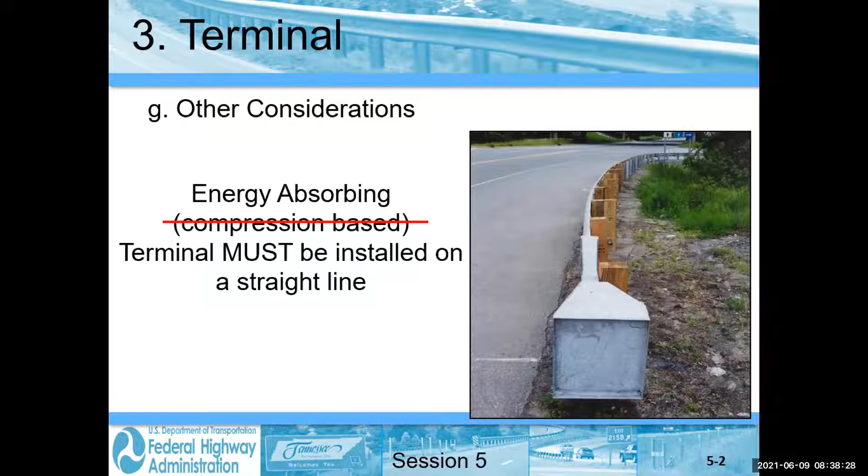The second item we had some discussion about was length of need. Both sessions today are going to talk about length of need for designers at length. Hopefully not excessively so, but so that you have a full grasp of it, because remember, it's the third and probably the most important of the three deficiencies we see in barrier.

I just want to go over this, I know it's a repeat. Some people indicated afterwards in the chat that they were aware of the Memphis situation I mentioned where kids were killed. If the NTSB, the foremost American institution on traffic safety, says this is the worst thing going, we don't want to give them ammunition to counteract what TDOT says in the design guide, that it's the first choice.

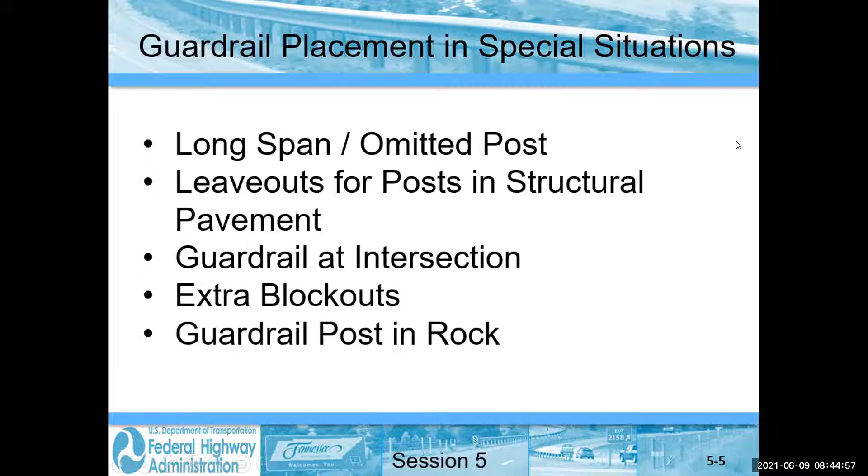Okay, leaving out a post. Many years ago, back in the 80s, we finally did some research to say, can I leave a post out? This is the old G4, 27-inch system, okay? And they said, yeah, I can leave it out, one post, if I nest the W-beam over the span and at least 6 feet on either side, depending where the splice was, okay? And this was issued for everybody to be able to use, and they liked it.

In fact, they liked it so much they said, well, can I leave 2 posts out? And they went and tested that - now this is testing with the big sedan, okay? And that worked too. Same thing: nest over the span, which is now 18 foot, and extended at least 6 foot on either side, okay? Well, they said, what about 3? And they actually went and did a test, and this was to 350 with a pickup.

The result was they needed 100 feet of nested rail centered on the middle of the span, and 3 posts on either side of the span, because there's going to be a lot more deflection. They didn't want a pocket on a more rigid post, so they put in what I'll call a soft post, a breakaway post. That was acceptable on the 350.

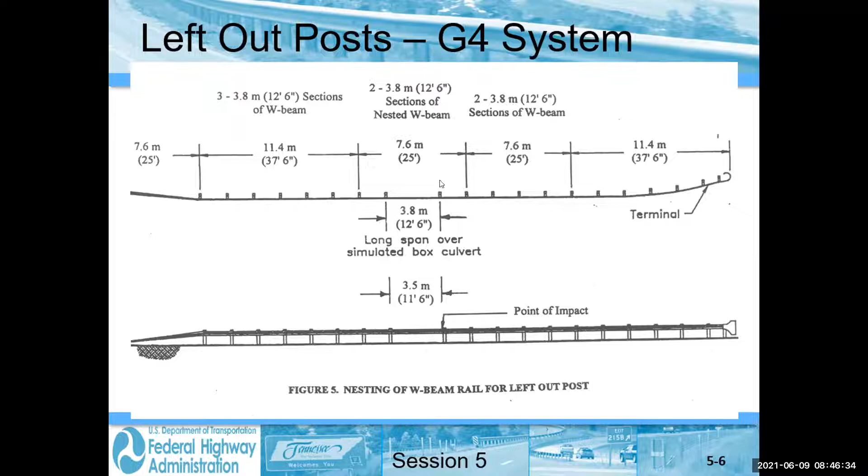Well, now we're in MASH. What do we have? Again, that was the old system. Now we have a better system. Actually, I saw this last night - this is going to be a repeat, but I'm going to show you.

So here I have the MGS system. I took out 3 posts, put it not over ground, but over a culvert headwall no higher than 4 inches. Took out 3 posts, did the same thing, put in 3 weakened posts, and then hit it with the MASH vehicle at 62 miles an hour, 25 degrees. Let's see it.

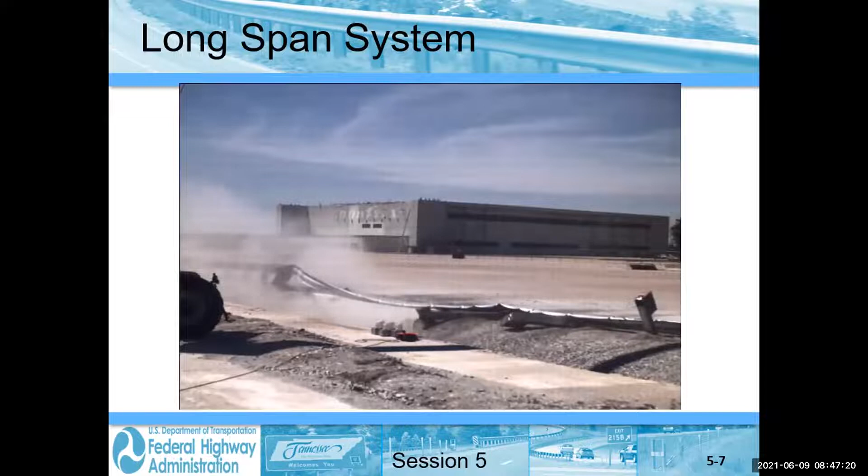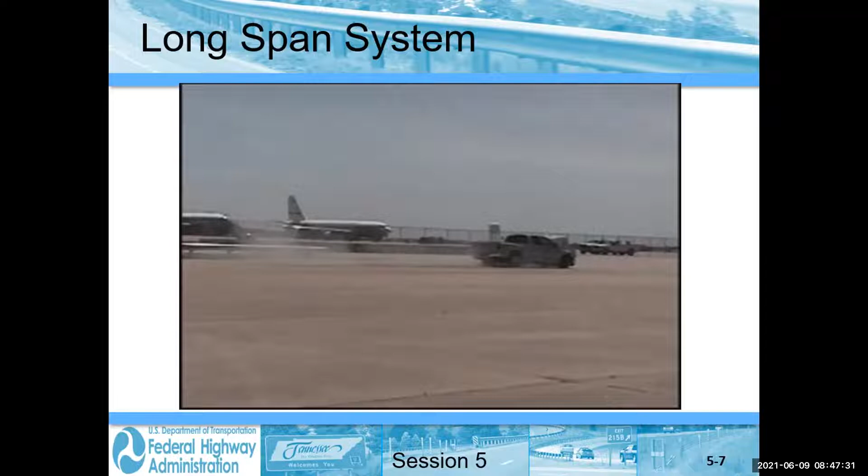Okay, pretty good performance, smooth redirection. It goes out over the void, but because it's engaged the rail and it's up against the rail, it just keeps on going down and we get a safe traverse.

Now, notice down here on the left, the deflection is significantly more. Remember we had 54 inches, I think, for the 8-foot post on the 2-to-1. So we got 40 more inches of deflection, which is fine as long as you've designed for that.

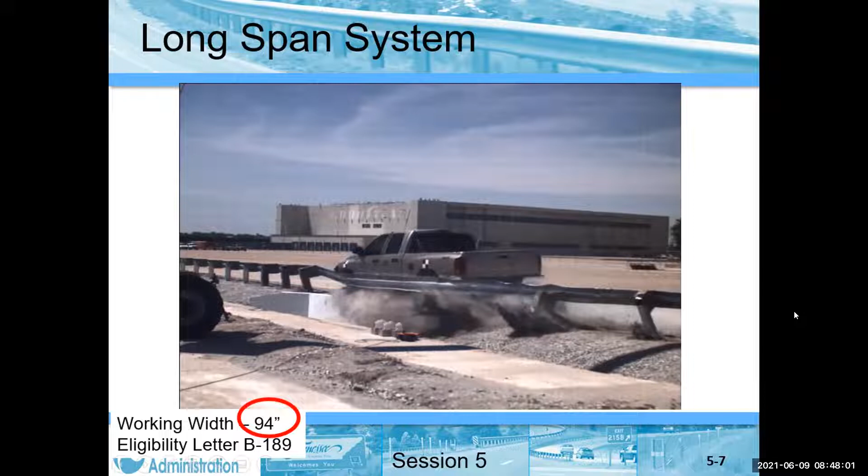So this was testing done with the great MGS system. Based on that, there's been some further development done. But for TDOT, right now, what's in the design guide says, if you have a place where you have to leave out a post, you go to the standard, and we'll see that in a second. If you have to leave out more than 1 post, you go to the standard GRS 3, and that's building a pad, a concrete pad, to mount the post to, if you can't drive it. We'll see that. So as of today, TDOT does not have something representing the video you just saw.

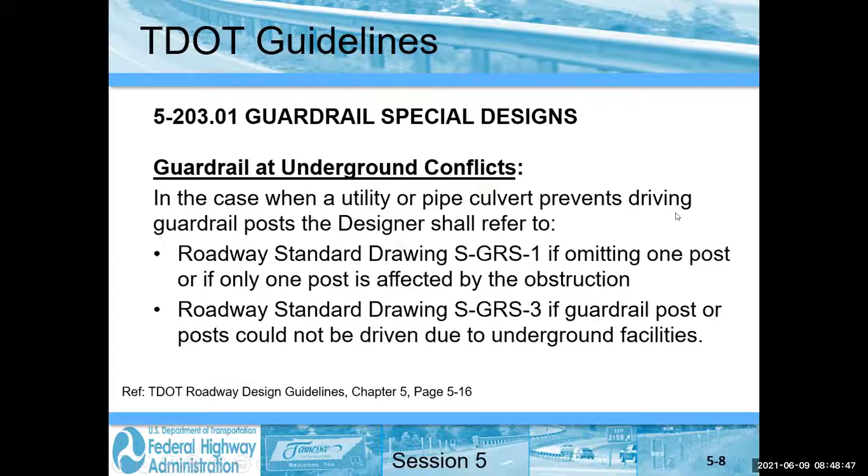And even as we're going to see on the -1, here we have the -1. Well, we have a missing post in here. That's fine. It's a 25-foot panel shown, except it says that over this panel, right here - you probably can't read it, but if you have your standards available, you would see that it says nested rail for 1 post out.

Well, we took 3 posts out and we didn't nest the rail, but we changed the post. Well, if it's good for 3 posts out, it's good for 2 posts out. Good for 2 posts out is probably good for 1 post out. But then we have to go to the yard and bring out 6 of these special wood posts. Here with your system, your standard, you're just using standard post, but you are nesting the rail for 37 feet.

Well, some people said, you know, this system is so good - yeah, you took 3 posts out and you had to come out with those wood posts. I'll bet you if you just take 1 post out, do nothing else, standard steel post, but no nesting, it would work. Now you can see I put up here developing. So always be aware of this - if you ever put in guardrail, you know that nesting rail is not a nice thing. So this is much simpler.

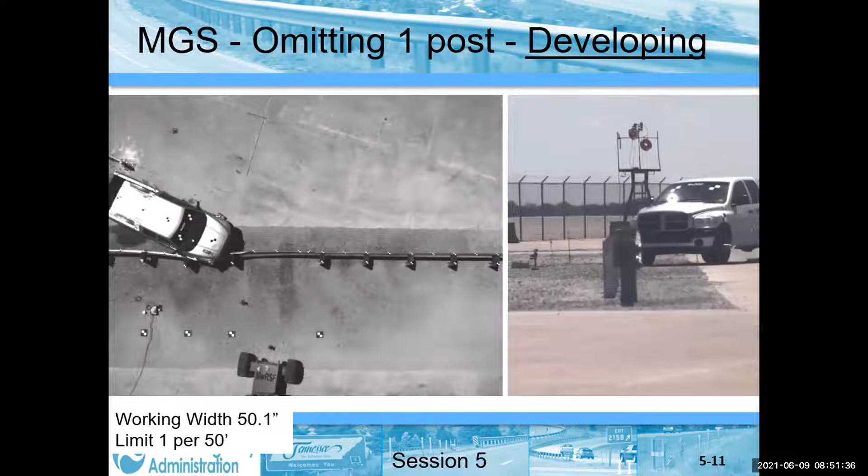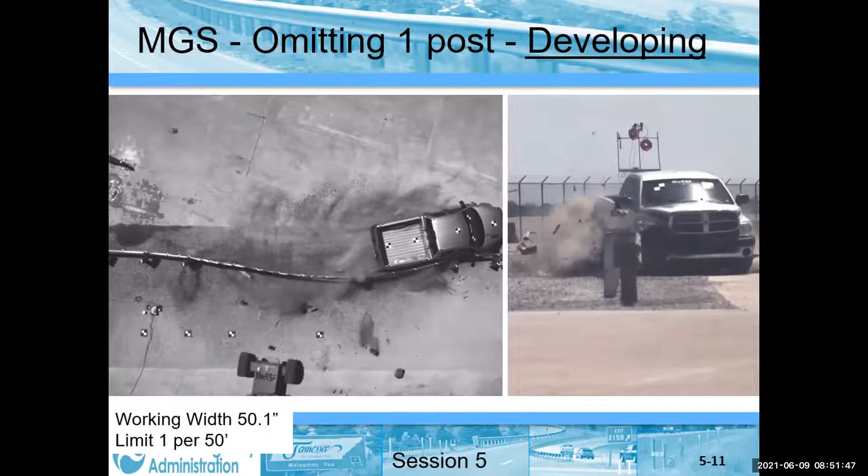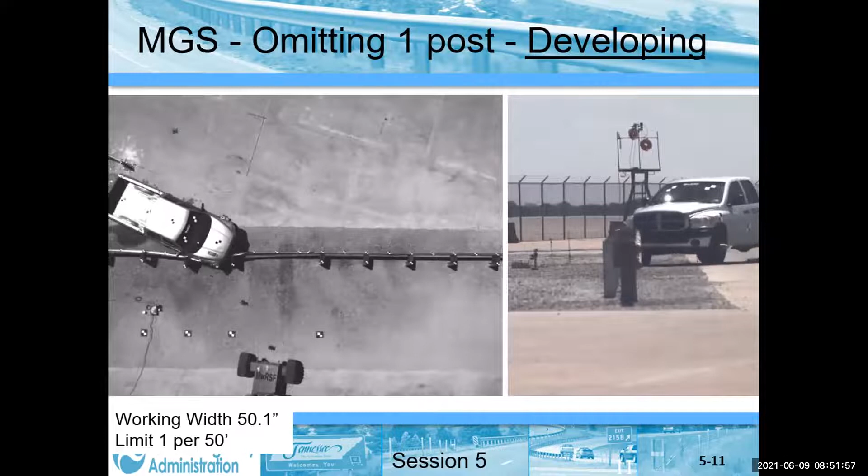Now, I was just told I have a question about nesting, and Devin, I'm not sure. To me, stacking is the type 12 where 1 rail is vertically on top of the other. Nesting - I actually asked my boss's daughters if they knew what spooning was, and they knew. So I don't know whether to ask you all, and they're only 13 years old. If you know what spooning is, it's 2 rail elements spooning. If you don't know what spooning is, I'm going to be showing a standard that shows. Actually, I just need to go back to your standard.

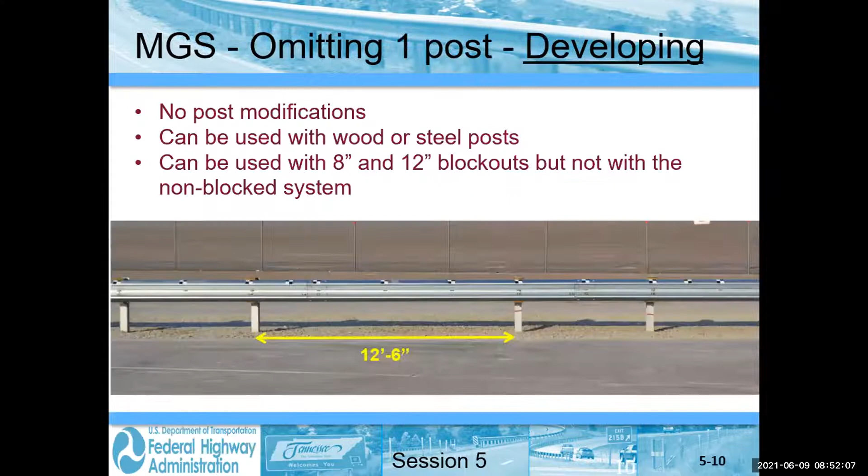Nested rail has one element inside the other, but it's hard to construct, especially at the splice where you have 4 rail elements. Just ask the contractor. So getting rid of the requirement for nesting eases fabrication, and we're probably not losing anything in performance. You saw how well it performed there.

But if you have more than 1, the current standard in TDOT is you go to this 5x5 concrete footer reinforced, and it shows you can go up to 3 of these. Actually, Pennsylvania uses this when they have more than 3. They use the 3 posts out with just the weakened post on either side, but they're concerned there will be places where they have 4, 5, or 6 posts they need to leave out.

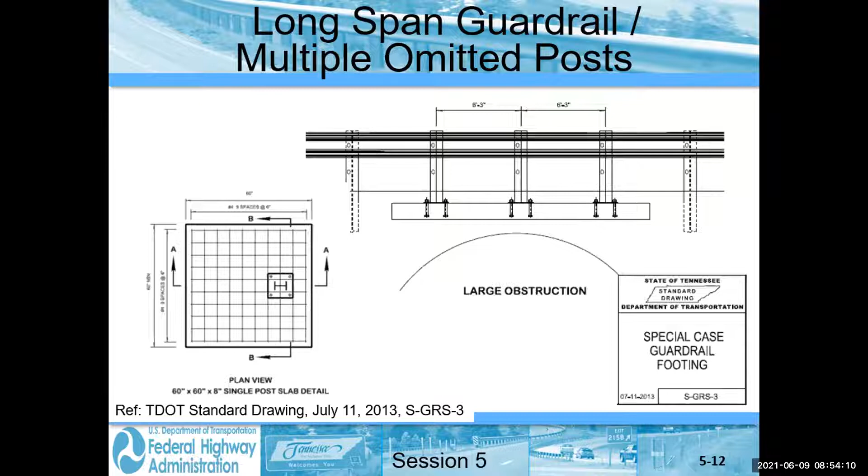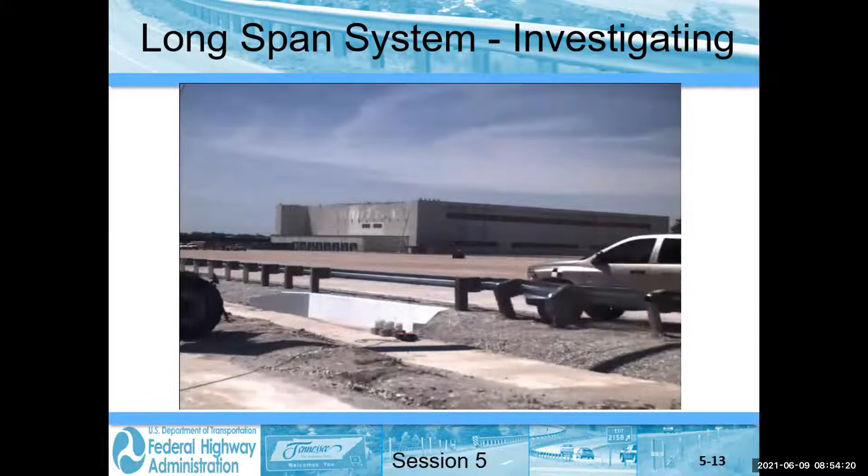It's just another tool that Ollie's considering whether or not to include. Like I said, I only played it once yesterday. I'm not going to show it to you again, you've already seen it. Oh, the anticipation. I'll go ahead and play it out.

Okay, so pretty good performance.

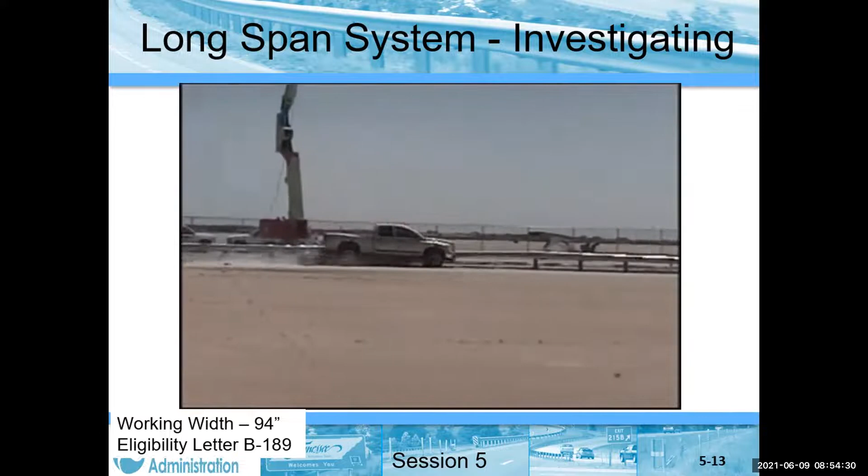Now we may have a longer situation like a double or triple box where it's actually at grade, and the deck is the riding surface. You have a standard to address that, where you mount the post pretty much the same as what we saw in the previous standard of mounting posts on slabs. That's things that happen in the field. I'm not aware this has been tested to MASH, but until it is, this has been the standard, there's no problem with it. So we'll continue to use it until somebody comes up with something different.

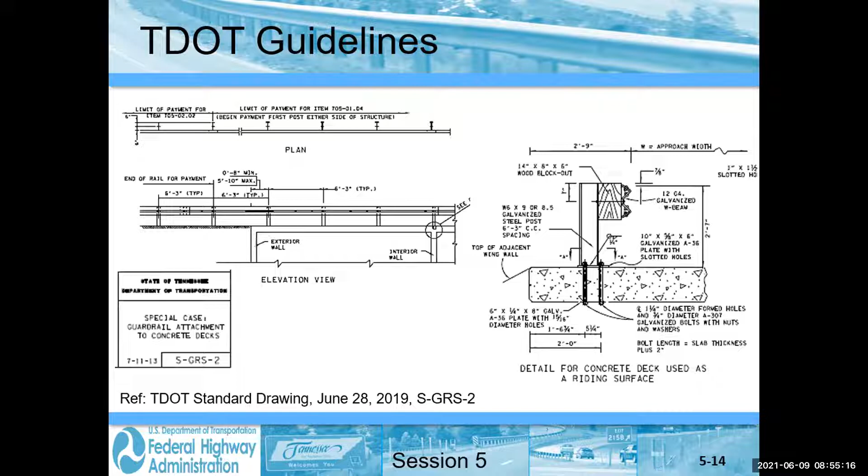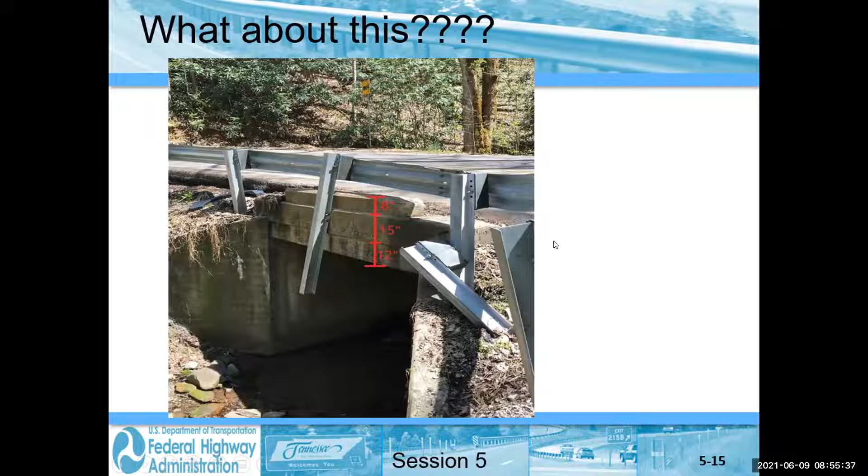Well, guess what? People did come up with something different, not for this, but for this situation: it's not the riding surface, the top of the slab is down maybe 12 inches or so, and that's not going to let us drive a post. So we'll just put it in the air, put a couple bolts into the concrete head wall, and we're good to go, right? Well, probably not so good.

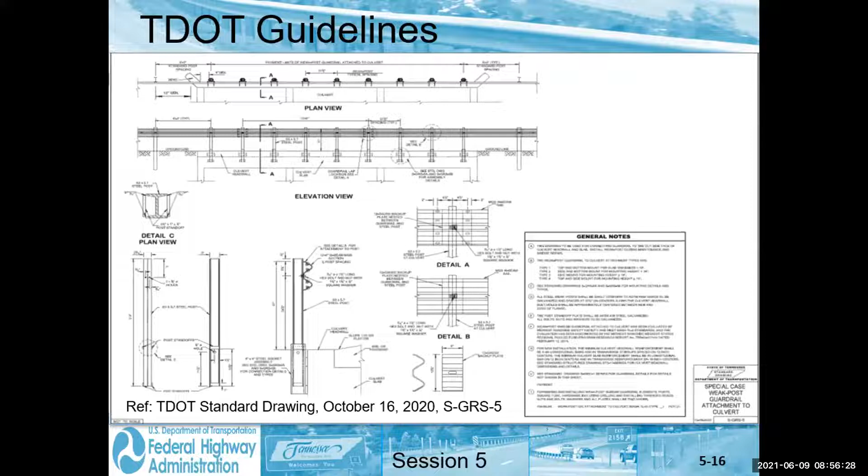So what we have in the standards, the dash-5, is what we call the weakened post attachment to the culvert. This has been tested to MASH, and it works somewhat the same as taking the post out. These are weakened posts, but now this can extend 50 feet, 100 feet. Every 3 feet, 1.5 is the post spacing now, with special mounting and special weakened wood posts. Now we have something to address the situation from the last photo. So this is the latest and greatest, these are all different situations for taking care of when I can't drive a post.

The left-out post alternatives. Second thing we want to talk about is leave-outs. In order to allow that post to move backwards some before it fails, I need normal strength material. If I'm putting a post into shoulder pavement, or in the case you see in the photo on the right, this is a mow strip, 4-inch thick concrete.

This prevents growth, it's a maintenance favor. If you put a post right in the middle of that, it would not be able to push back and deform the material, because that concrete is too stiff. Well, you say, there is concrete there. No, it's not concrete, it's a grout, a weak grout, 120 PSI, less than 8 inches thick. It still will stop the weeds hopefully, but it will still allow the post to move back.

So this is the intent of the leave out, whenever you have structural pavement for whatever reason, and structural pavement thickness has not been defined, is that 2 inches?

If you're just putting out erosion control paving, the standard doesn't define it, okay? But you don't have to worry about it because right now there's nothing in the standard to address what to do. Just to put this in perspective, when this was presented, a gentleman from Minnesota got up and said, now you're telling me that for 6 months out of the year, because of our frost penetration, my system's not going to work.

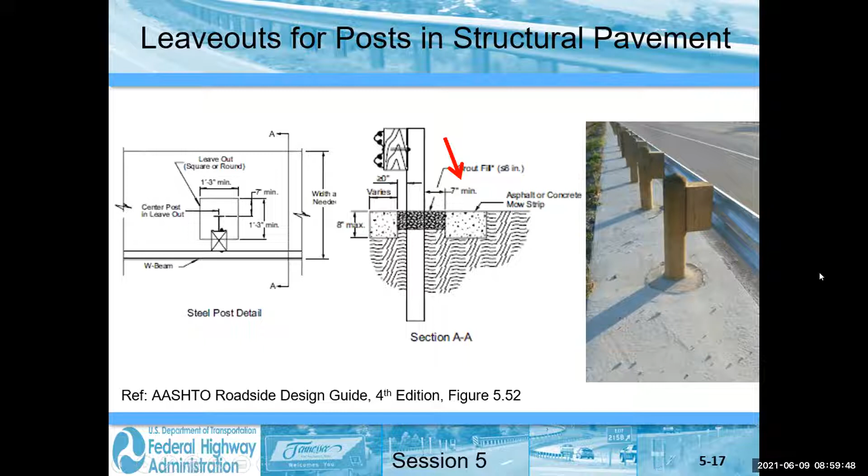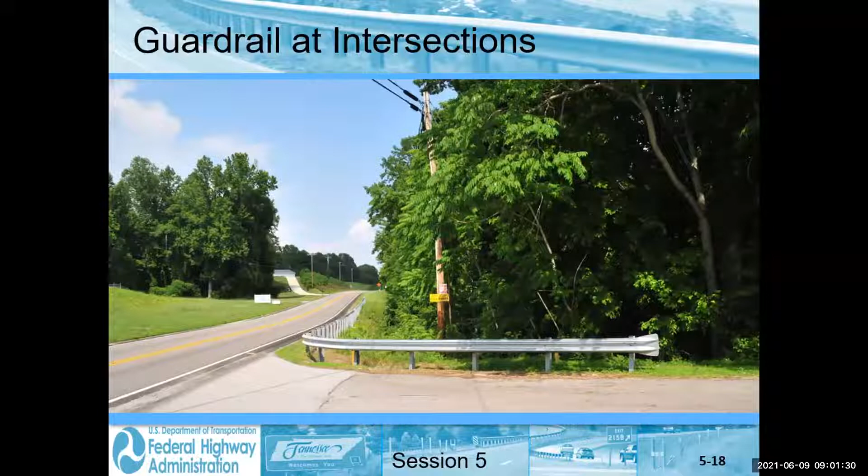Okay, so what do we do? Well, in TDOT, you as a designer have guidance that says when you have this, you will go to the S-PL-2 and you will use an inline anchor along the main road as called for in S-PL-2 to develop tension along the main road, okay? But we'll look at S-PL-2 coming up.

It has several alternatives. It says when you can't do this, because to use any of the alternatives in S-PL-2, you need about 25 feet going down the side road. Well, if it's a public road, you can generally do this. But if it's a driveway, I don't think you got many people in Tennessee who want the last post driven in the middle of the living room. So we have the S-GRA-4, we'll look at it. Okay.

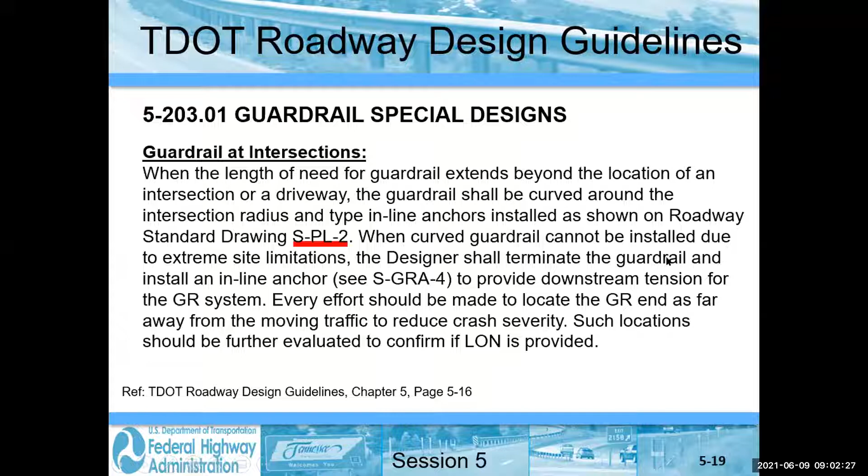So here's just one of the alternatives in the S-PL-2. This is for when you have a side road. There's another alternative that shows if you have a driveway. Okay, but again, it goes around the radius and extends down. Now, the radius can be as tight as a 15-foot radius, but it still takes distance down perpendicular in order to

develop the tension, because now this is not going to spread the tension as we've seen in the redirection test on hitting on the side up here. We have tension - here's that inline anchor, okay? We have tension if we hit along here, it goes back and goes down through the cable. But the tension that's developed in a hit on the nose here of the radius someplace is like a spider web. Okay, and it's going to need to be pulled from this side and pulled from this side. And it's going to have a big deflection in here.

And that's why we have this area here, Table A, that says you need to have an area that's clear to allow for this large deflection. It can be a 2-to-1 slope, but it can't have any vertical rigid object that's going to stop it from continuing to move out, and so you have the dimensions of what this area clear behind here needs to be.

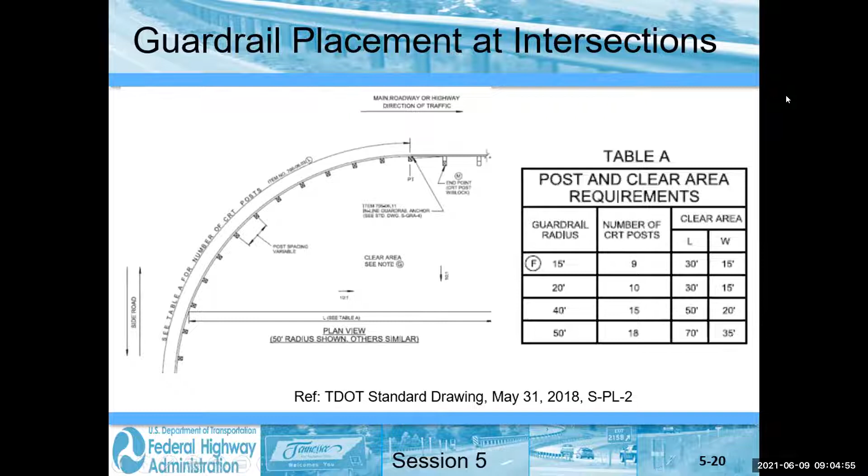Do you think you're going to build it? Texas didn't even put it in their standards yet. Well, there was a study done that Ali's been waiting anxiously for. He keeps telling us because Karen's company has the contract to do it. So you're going to get to see a video that's not been released. This is what you get for coming to visit with us.

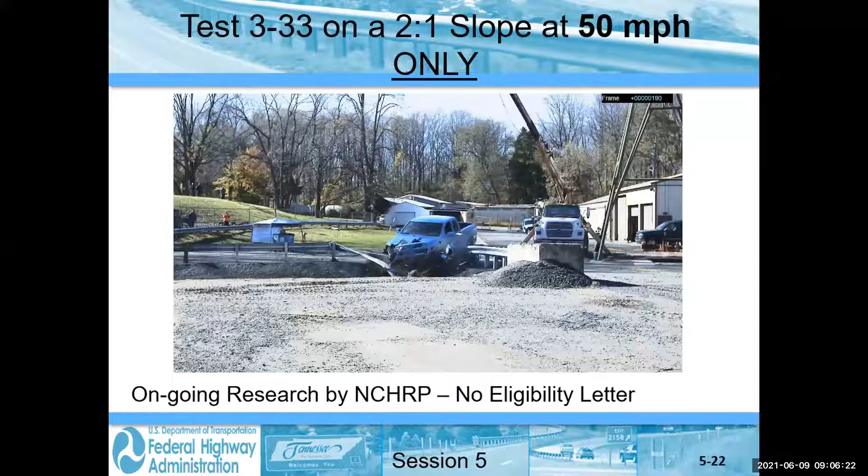Let's see. Oh, guess it didn't. Nope, it does. Well, now I took... this is 62 miles an hour. The rail wraps around. Whoops, the rail's not wrapped around anymore. How's that stopping? That stopped that truck just like a crash cushion without the rail there.

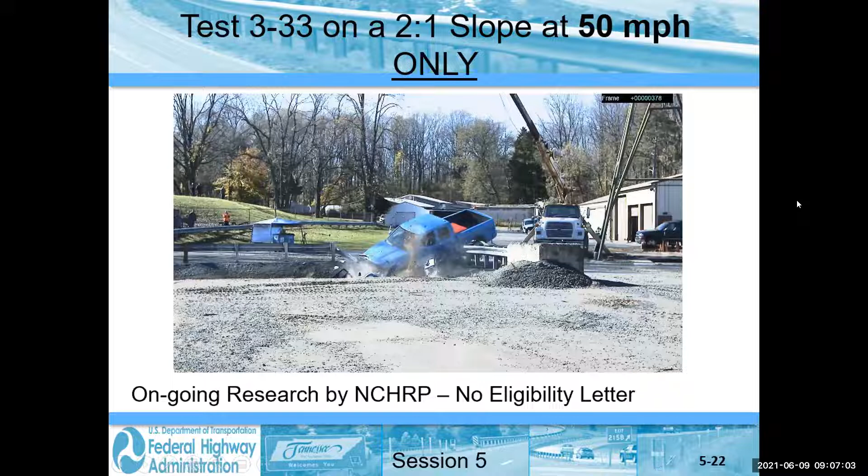It's invisible force. No, there are two cables in this. This is 10-gauge rail wrapping around, and it has two cables associated with it that will, if the rail doesn't engage, the cables will engage and be able to stop this vehicle at 62 miles an hour right into the center. So this is still in the research phase. It has not been submitted for publication yet, but it's on its way, out for review.

Okay, what does the -4 tell us? Well, it tells us we can't go into somebody's living room. So here, if we have a driveway and we have to leave an opening in the access of a standard run of rail that normally would extend right across the driveway, the last alternative, if you can't put in the ones that were tested, even the old testing, which run down here to develop the tension, you come along, you put an inline anchor in for the main line roadway, and you put a radius around, standard steel post, it doesn't matter, it's just going to push over.

But it's not going to spear you, hopefully. So this is what we have in the standard to address at a driveway. As I said, some states will go, and this is not cheap, but it's not that expensive. Some states will put a type 38 on the end here, and for two-way traffic on the end here. That starts running up in money. This is what TDOT has given you to use.

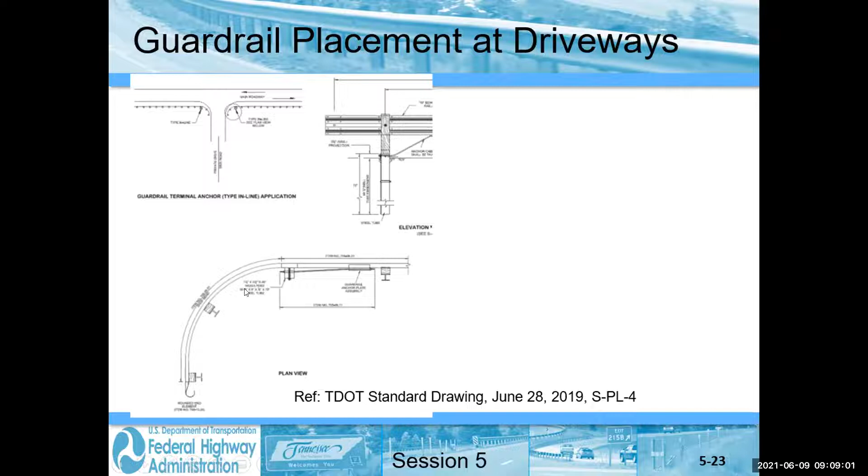Not crash tested. Actually, that being said, we do have an 8-foot radius that has been crash tested at 60 miles an hour, but not to MASH. And so it's not in published literature anymore. It was approved by Federal Highway, but it's not in the published literature anymore, but it may be something that we should try to replicate exactly to have something that we can say, well, we tested it at one time and it worked. But you have it anyway at the radius that needs to be used here.

Okay, so that's it for the most difficult problem we have along all our roads. What do we do at access points? Even that video I showed you from the study still requires developing the tension along the side road. So it's not going to be good at driveways, maybe at field entrances, if you can put it out and get the farmer's approval, but it's not going to be good at somebody's driveway where they're right along the roadway.

It's the same concept. If you've got more than or equal to 18 inches of dirt on top, we're saying there's a lot of movement allowed in that 18 inches. Now you only have to drill 12 inches into the rock, and it can fit the hole, 8-inch for steel, 12-inch for the wood.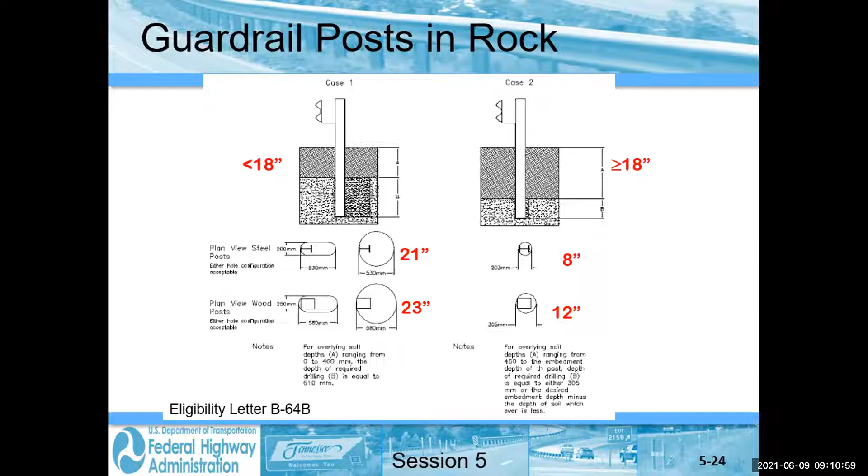I couldn't find a standard for this, so I guess TDOT, you don't have any rock in Tennessee, right? No, you do. You go to your spec, and it says exactly the same thing. If you have less than 18 inches, you will drill the 24-inch elongated hole and backfill. Then it has the second thing that says, if it's more than 18 inches, exactly what I showed you in the picture. This is perfect.

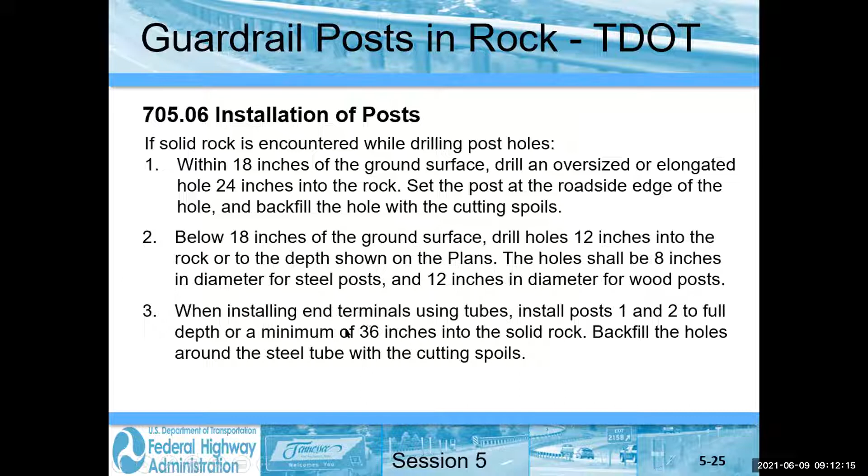Now, when it gets to the terminals, this is for standard runs of rail. Remember we talked about developing anchorage for a cable at the very last post. We have an anchor. That post must be totally, at a minimum by the spec, 36 inches into the rock, or to the depth shown by the piece of hardware we're putting in for the two anchorage posts. Beyond that, you can follow this. This is to make sure we don't get what happened back in the early 2000s with the cutoff posts, cutoff steel tubes.

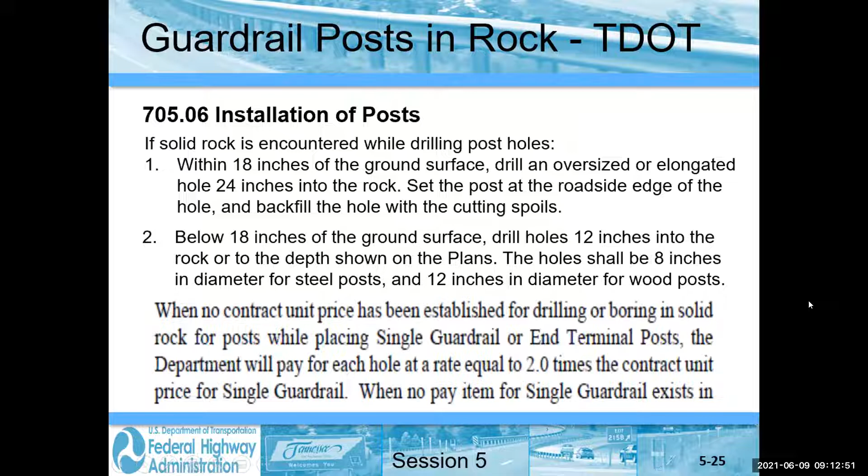And if we didn't know we had the rock underneath there, there's a very nice item here that addresses how to pay for it. You're just going to pay 2 times the contract unit price per lineal foot of standard regular guardrail. So, very nice, but not necessarily the right way to do it. We don't know whether 2 times is right or not. We should have a bid item for it, but this at least takes the guesswork out if we missed something.

Okay, what about extra blockouts? If I drive the post, I'm going to hit something, but if I move that post back just 8 inches, I'll miss it. Well, 8 inches, that sounds like a blockout. So can I do that? Well, we have not tested it that I'm aware of. I'm still waiting for Ali to send me the study. But nationally, it's always been accepted.

Say what? He did, okay. Thank you, Ali. Karen just told me he sent it. It's nice to have support to back up.

But this was always accepted even before the study was done, that you can put in 2 blocks. Remember the purpose of the offset block: it's to minimize the snagging on the bottom of the post as it goes into the ground. Well, what if 16 inches doesn't do it, but 20 inches would? Can I put in more than 2, but no more than 3? I can't even count as high as we have here. But this is a different situation. This is where I've already stiffened up. Look at the spacing, I'm probably okay here.

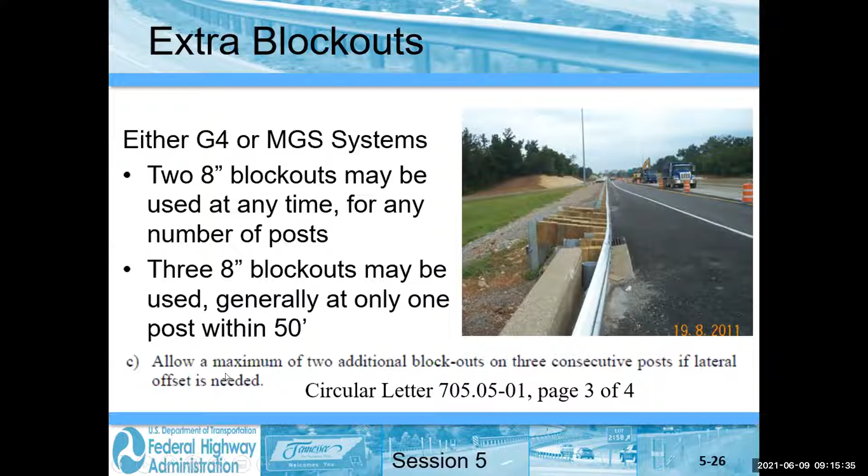But for the standard run of rail, remember what I said happened? When the bumper hits the rail, it starts to push the whole thing backwards. The rail is supposed to come off the bolt. But as it starts to push back, if I had more, or 4 blockouts back here, the first thing that's going to start to do is lift up as the post rotates back. And as it lifts up, before it releases, I may get the smaller car going underneath. We're concerned about that. So what we said nationally, Federal Highway said, is you can put 3 blocks, but generally only 1 within 50 feet, so that it will rip off that bolt head before it starts lifting the post. Now, the roadside design guide said something else, and what Ali sent me is in your circular letter 70505 that you should all have, it says allow a maximum of 2 additional blockouts on 3 consecutive posts. So even though this says generally only 1, you are allowed to have 3 blockouts for 3 consecutive posts.

And that comes in handy a lot of times.

Next issue we have in the field a lot: maybe we had this barrier here shielding this sign support, and this meets all the criteria, but then something happened back here that we needed to put rail in. Actually it's the other way around, because this is older rail - it doesn't even have a cable to develop anchorage.

But anyway, we had a gap between the end of one and the beginning of another. Should we leave it open? Well, come back here in 10 years, and if it's open, you're going to have a very abrupt stop. Actually, getting across this ditch is probably not an acceptable ditch.

So regardless of cost - because we have to pay for type 38 here, this is freeway, and pay for type 13 here - if I just filled it in with standard guardrail, it's probably cheaper. But as you saw in the videos, hitting this at a shallow angle is like Usain Bolt running into the wall. Not nice. So as long as you don't need access in here, fill it in. And if the splices don't match exactly, you can make it match in the field.

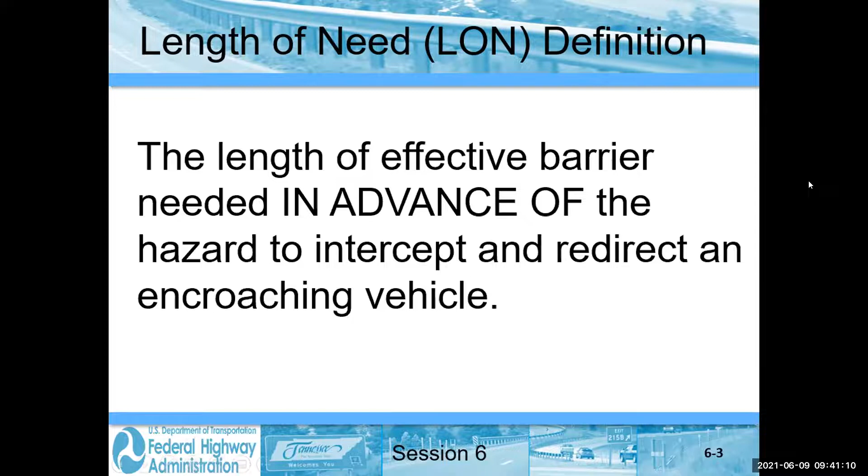Okay, bunch of words, you don't understand what you're saying. Here we have a hazard. Everything upstream, remember upstream is as you're coming, you get to upstream and then you go down to downstream, okay? Everything upstream of the hazard is runout area. It's clear zone that you can drive in, that you've accepted, or it may be like a 2-to-1 cut slope that you've just accepted people can drive on. But there is no hazard that I'm trying to shield in advance of this point right here. That's physically defined, going out there and looking at it.

And what the theory of length of need, how to determine length of need: there is some distance, we call it L sub R, a runout length, a defined distance in advance of the hazard, that if you leave the roadway at any angle at a distance greater than that specified distance, you can come to a stop before you get to the beginning of the hazard.

Okay, very simple, not defining any angle, any path, okay? But it's a long enough distance that we're going to define that if you leave in advance of that, you will not get to the hazard. So what's the problem here? How do I define L sub R?

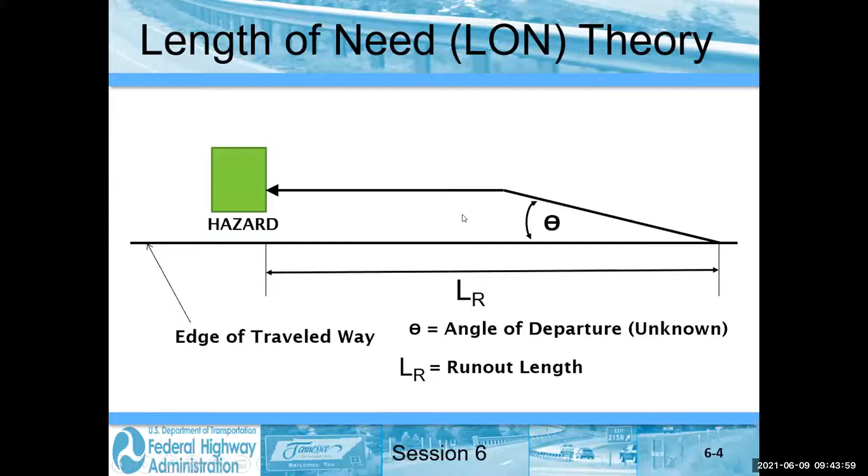Okay, so it's really easy for us practitioners. L sub R is just a lookup value off of a chart. Okay, but what L sub R is, is very important based on the effect it has on how much barrier we need in advance of the hazard. Well, there it is, right on S-PL-1, based upon speed and based upon what the volumes are, we have distances. These are pretty...

Pretty long, look, there's a football field, okay? And this is going to give you long runs of barrier in advance of the hazard. And that's why we don't get it sometimes. But remember, I said this is the latest values. Previous values, this was 480. They got reduced 25%, and it's almost an exact ratio of how much we lessened it to how much less barrier we're putting out there nowadays than what we would have put out there 15 years ago or so when they changed. Okay.

So what else we have in S-PL-1 is we have a nice little sketch, figure B, whatever it is, okay, to figure out, we identify the hazard. It may be 2 feet, it may be 200 feet, it may be 2,000 feet. It has a length, and we're going to be putting barrier in front of that. But we're also going to be putting barrier in advance of it. If it is a one-way roadway, we will only have it on the upstream side. If it's a 2-lane roadway, then we're going to have the LON far side, okay, for people coming the opposing direction, crossing the center line, and heading towards our hazard coming this way, okay?

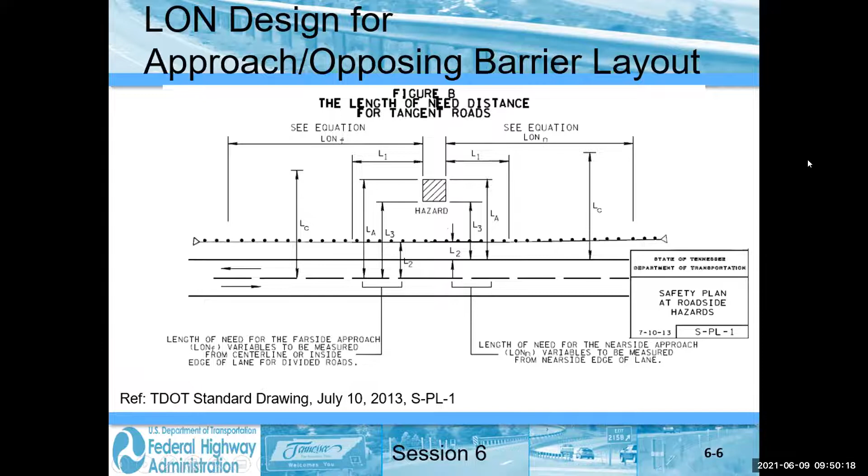So we have the parameters identified. Here's the equation. We have that LA, which I said we have to be able to define, limited to the clear zone. We have the offset. Down here we have the same LA in our lookup value of LR.

We got an extra term in here, 0.75. And you go to note A. Remember, we are supposed to have a 1 foot offset for our type 38s, our type 31. That moves the beginning of length of need point, which is 3/4 of a foot, farther away. So I've increased my offset.

This really could be put in parentheses as L2 plus 3/4 of a foot. Now this is going to be, again, with the new terminals we're using, it's not exactly, but it's good enough for government work. But if you cannot flare it, if you're on a lower type road and you cannot offset that terminal, that 1 foot, you drop this term out.

It's in there only because I have flared the terminal, and that can account for at least another stick of rail. It's very good to have it in there, but make sure you understand why it's in there. And if it's not appropriate to be in there, get it out of there. So the legend here is exactly what we went through, and hopefully I don't need to go over it again.

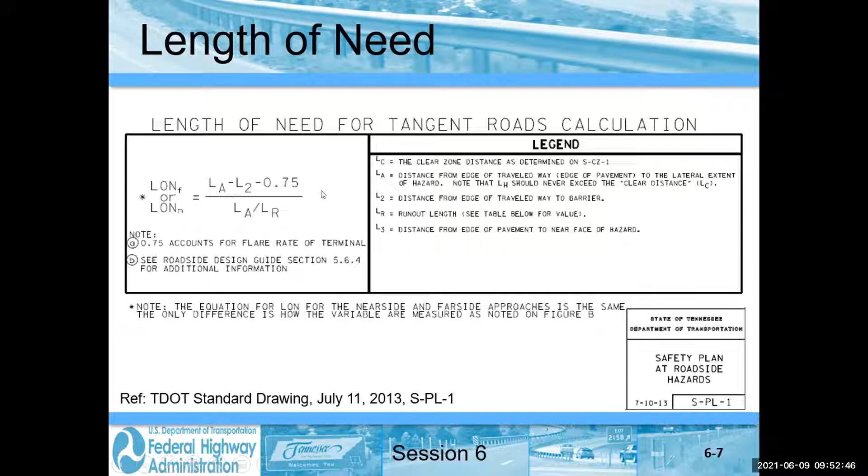What we just went through here, this formula is fine on a parallel, a tangent installation. If it is a flare where I'm using L1, you're going to have to go to the roadside design guide and get the extra term you're going to put into this formula, which is the flare rate that we talked about yesterday. It gets inserted into the formula. This is for a parallel installation.

But it is not appropriate for a curve. All this is determined by is just plain geometry, similar triangles. That's all we need. But if I have a curve, I don't have that application.

Well, we're still going to use the tangential application, the simple formula, as long as that curve has no less than a 2,000 foot radius, unless Ollie puts out something else. That's a soft enough curve that we're not going to have to go through the complication here.

And this is not an exact science. Remember, we had this argument about L sub R for a decade or two. So if the curve on a high type road is more than the 2,000 foot radius, then just use the formula. But you're going to have a whole bunch on your local roads where you got 700 foot radiuses, 500 foot radiuses, 300 foot radius. You're going to have very small radius.

So what TDOT has given you is a way to calculate out with the arc sines. I thought there was archangels, I don't know what an arc sine is. But anyway, it's a very strict application of the math to determine where this length of need point would be in advance of the hazard.

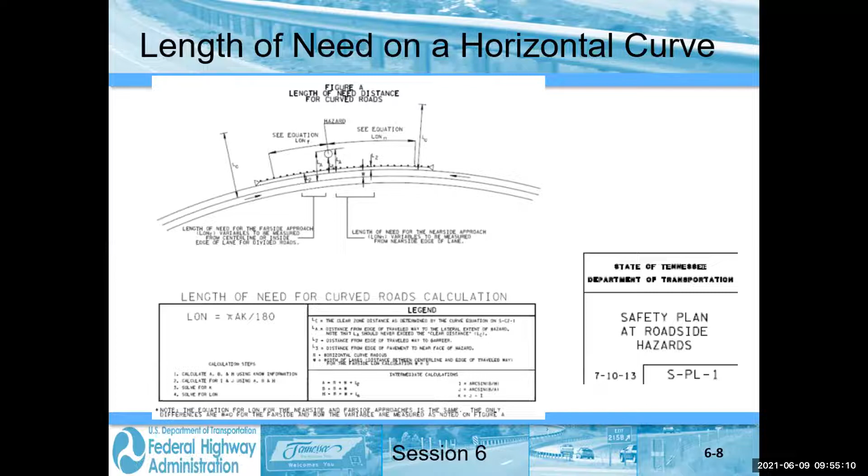There may be something where you say never exceed the clear zone. What if I have a drop off into a quarry? My clear zone is 32 feet and the drop off into the quarry is at 33 feet. Do I say I don't worry about that quarry and people dropping into it because it's outside my clear zone? No. This is not a class on roadside design, this is a class on barrier, but please do not get into the fact that clear zone is an absolute. Remember the table that's in the clear zone standard - it has a range, it is not an exact calculation. Vehicles don't know where the clear zone ends. So never say never, okay?

And here's a good example right here. Well, let me get to it after I go through the first part, okay?

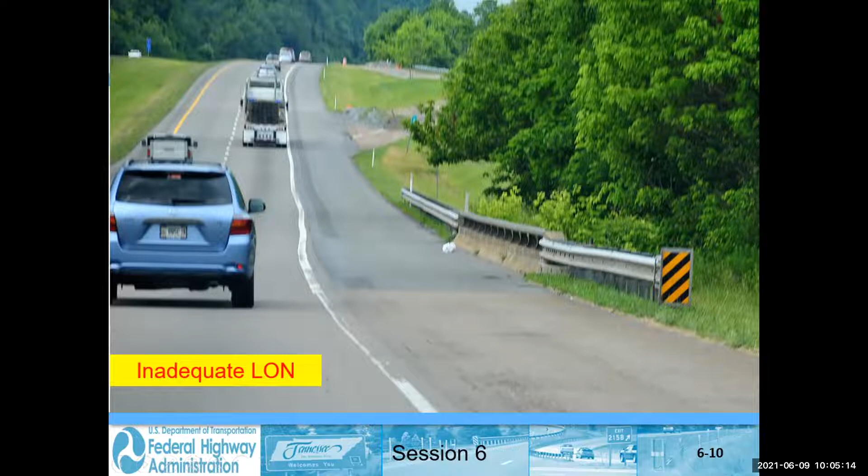Try again, still on the freeway. Why are we talking all these freeways? Because this is all the pictures I have, okay?

So what do we have here? I think a pretty bad hazard. Where did it begin? I don't know. It looks like maybe a 12-foot shoulder, 10-foot shoulder, and then shoulder grading another maybe 8 feet, okay? 10 to 1, maybe it's not shoulder grading, but it's 10 to 1, and then I'm going down on 2 to 1. Well, that 2 to 1 is a hazard.

Now, you may say, well, 2 to 1 only if it's more than 6 foot high. Well, when you're putting out barrier, here it certainly is more than 6 foot high. If you're putting out barrier for this, you may want to shield even through wherever the 2 to 1 is. That's just whether I'll put barrier out there or not. I'm not going to shield something that I've made a determination is no worse than hitting barrier. But once I'm putting barrier out there, because the depth of the fill gets deeper and deeper, I may want to redefine my beginning point of need. That's just a judgment decision. Document what you do about it, okay?

But anyway, this has about 0, if that, effective barrier, because the barrier is not effective to the third post here, in advance of the hazard. Not only that, this is the non-energy type of terminal that if you hit this at any angle, it goes poof. If this were an energy absorbing, your current type 38, and you came down here riding nicely, and then smack into it, you're going to be captured up here. Probably not go down there, okay? But with this type of terminal, it's doing nothing except shielding the end of the guardrail.

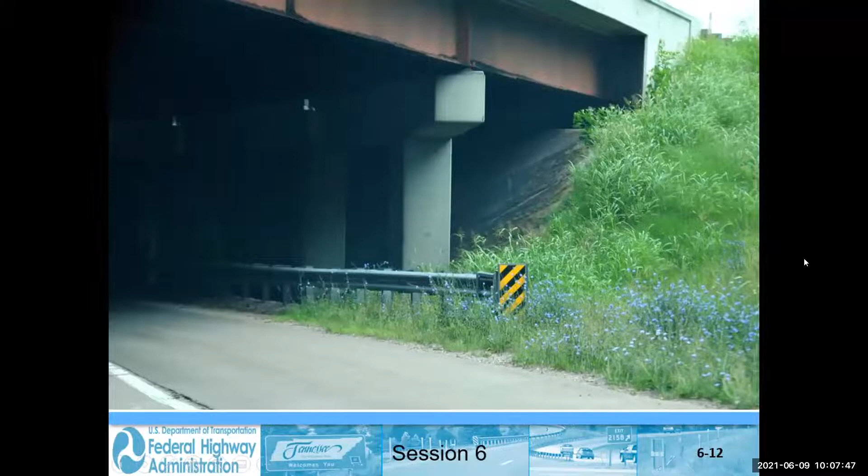Well, what do you think about this one? What's my hazard? Probably this, probably not the 2 to 1 parallel slope. But as I wrap my embankment here for the bridge around, if that transverse embankment, 2 to 1 slope typically, transverse looking right at me, is within my design clear zone, then my design clear zone is going to be my back of hazard, okay? Because you don't want to hit at a high speed a 2 to 1 transverse slope. It ain't going to be nice.

So this again is where you have to look, and this is very, very often missed on bridges, whether it's a bridge over like this or a bridge under. We see the immediate, either the bridge rail or the bridge pier, and don't look at the other hazards, okay?

So this is terrible. We haven't even got enough length of need to shield this, because if you use the back of hazard being the back of the pier, came back the L sub R and did the calculation, you would still probably need about 197.735 feet. Just did the calculation, okay? It's not enough. It's poor. Also remember, same as we talked about on the drainage under the bridge, make sure you've evaluated all hazards.

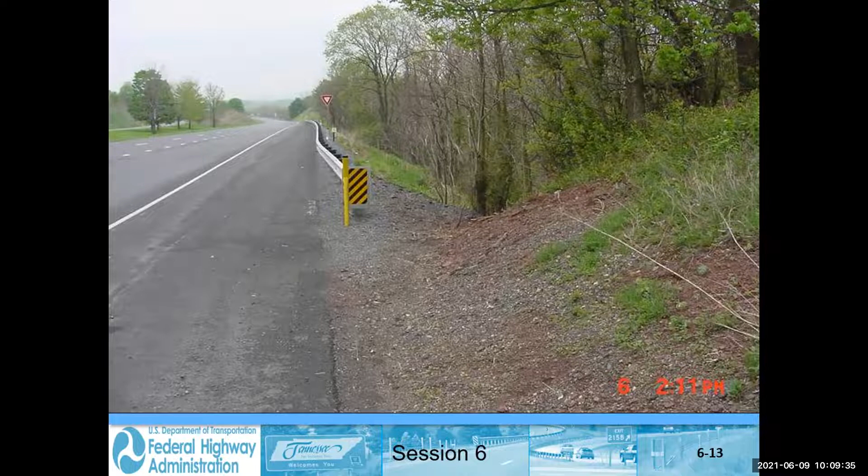I'm getting tired of seeing this. Oh my gosh, we saw this before. We talked about it, but we didn't go through quite as much as I'm going to make you think right now. If I had a poll, I'd put it up, but I don't. How many people think, hopefully you all think, this length of need is inadequate? We already said that. But if I asked you, what is the value of the length of need?

You should all answer and say minus 12.5 feet, assuming the delineator is right at the beginning of my hazard, the cut to fill transition. Remember, the first 12.5 feet of this type of terminal is not available. And notice this plastic delineator, this is on the traffic side, but probably no problem having something on the back side to keep those mowers from taking these out, Mark, for your question.

So what the point is here, how much is being provided? A negative 12.5 feet, okay? So just terrible. They didn't even rate a not adequate, they rated a double F, okay?

So how simple it is to do it right. You identify the hazard. You generally, not never, but generally limit it to the clear zone. If it goes on forever, yes, you're going to limit it to the clear zone. But for the type of examples I brought up, the quarry, the opening between the bridges, think a little outside the box, and it doesn't add that much, even though intuitively you would think it did.

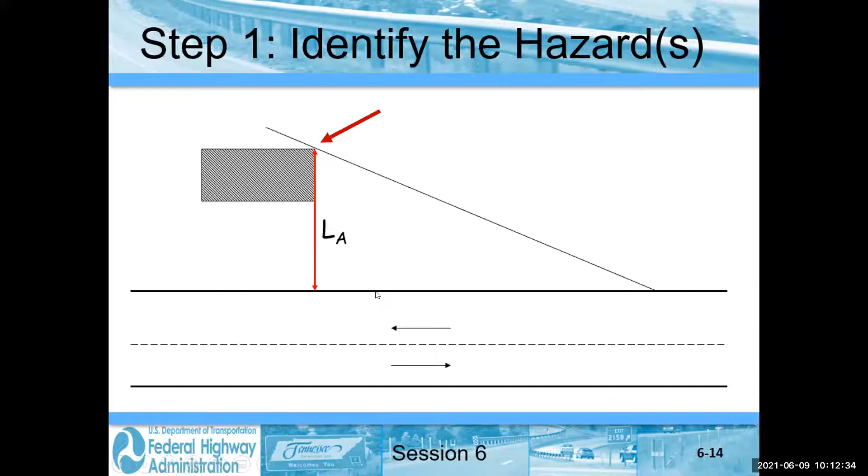Okay, so you identify LA. You identify where it begins, maybe simple, maybe a little more complicated. You go to the back of the hazard point, this is the procedure, at the upstream end, and you snap a line from L sub R distance in advance to that point on the back of the hazard. That's the whole procedure. And then I'm going to put my barrier someplace between my edge line, hopefully not on my edge line, and the front of my hazard. The L sub R was just a lookup value.

Here I'm going to determine my L2, how much I can move it off. I want to maximize it. Why? Because it's going to extend from the beginning of my hazard to where it intersects this line. I call this line drawn from L sub R to the back of hazard my line of interception. This is where effective barrier begins on down here. You can see if I flared this, I would intersect it sooner. I need less barrier and it's farther away. This is what your formula calculates: the length of need, we're talking N right now for near side, of effective barrier.

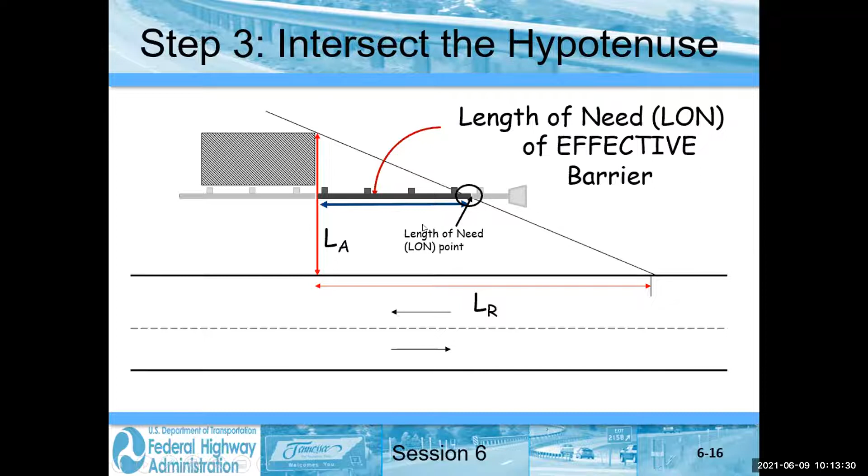Well, what about on the downstream side of a one-direction traffic? Remember I told you if it's coming the opposite direction as shown on the sketch, figure 8 or B, you just go through the same procedure with all measurements made from the center line. But if everybody's going in one direction, then all I need to do is bring my barrier, the length of need plus the amount in front of the barrier, to where I no longer need effective barrier.

Well, we typically use 25 degrees as the maximum angle of departure. So I could bring it down to where I intersected a 25-degree line coming back from the downstream point where I don't want to get. Well, that gets a little complicated, so we're just going to say use 90 degrees. It generally makes a difference of about 5 feet, okay? So we're going to bring our effective barrier to the end of the hazard.

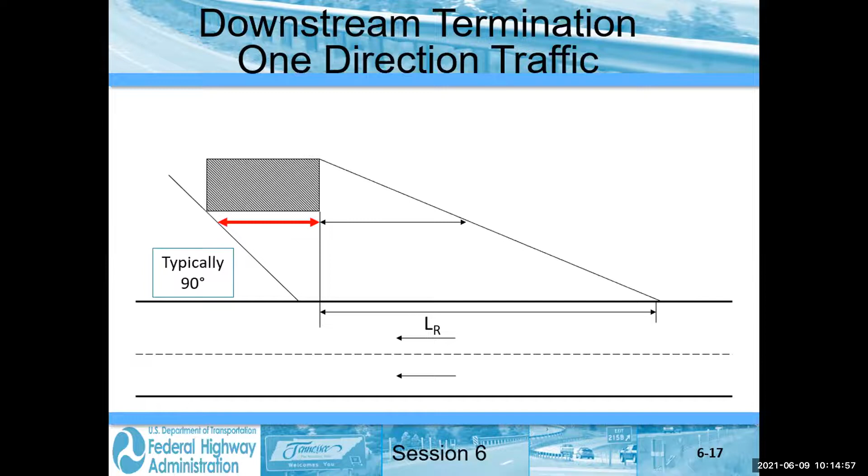But in order to be effective barrier, remember I mentioned with the type 13, they have now found I do not have effective barrier at the beginning of the type 13. I got to come back 25 feet to that 7th post in order to have effective barrier. So the amount I'm going to have beyond the end of the barrier is going to be 25 foot of added rail and then my type 13. This is for one direction traffic. Locals probably don't have too many of these, but you could have a one direction roadway, a one-way roadway. Not a divided roadway. And so this would still apply for a one-way roadway, someplace where you're going to use a 13, which we said is only an anchor and cannot be hit by approaching vehicles.

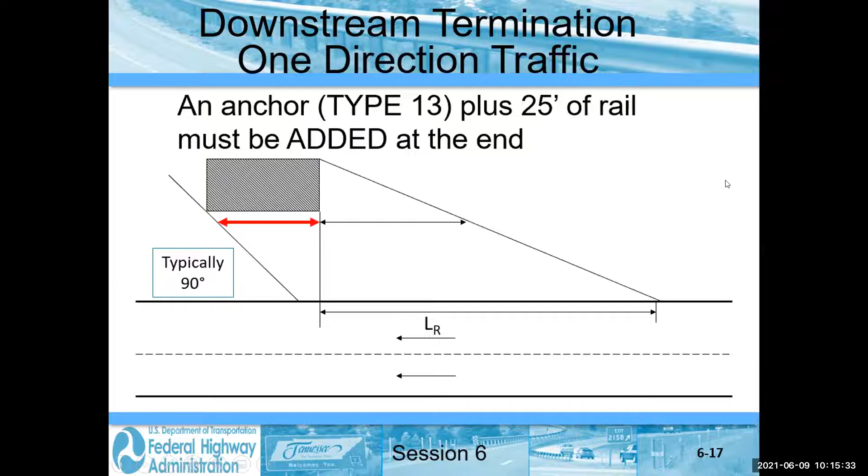Okay, let's look at the combination alternatives here. For on the downstream side of a hazard, depending whether it's one-way or two-way traffic. So on the approach side, I'm just going to go through my length of need procedure that's in the standard SPL1, calculate out that X value or LON.

Realize that part of effective barrier is included in the terminal. Remember, if I have a terminal, let's go back to the old one, simpler to talk about, that was 50 foot long, and I had the BLON at the 3rd post, that said that 37 foot of that terminal was effective barrier. So I can include that in my value that I calculate out. I don't have to put out standard barrier for that. It's already effective barrier. So at some point on the terminal, I can include the part that's beyond the beginning of length of need.

Now, at the time you're doing this calculation, you don't know which terminal the contractor is going to pick. So I'm going to give you a nice number to use, but you use whatever you want. Just recognize that part of that type 38 or the type 21 is effective barrier. The part beyond the BLON, typically 12.5 feet to 16 feet. So on the advance, I know what I'm doing.

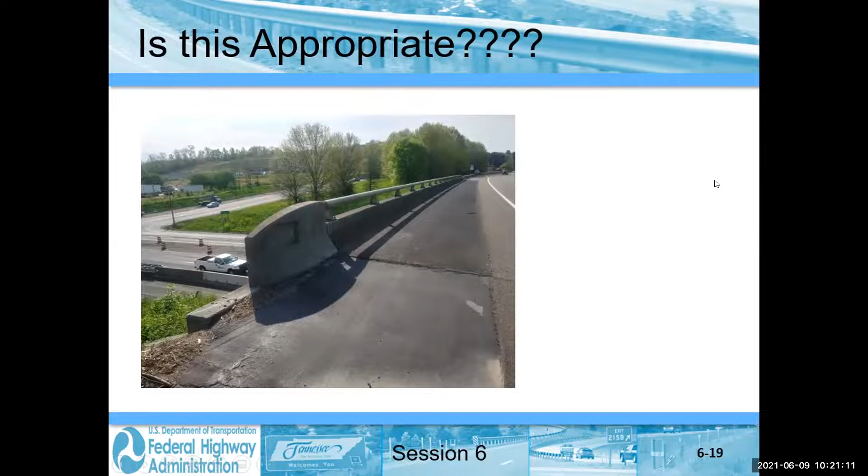Okay, so here's the example I was referring to. Is this appropriate? Let's say this is a 2-lane roadway, and I went to my chart and my design clear zone was 20 feet. I had a 12-foot lane and a 10-foot shoulder, real nice road. So my available clear zone is 22 feet, okay? So this is 22 feet away from the center line, and my design clear zone was only 20.

Okay, we're going to take a poll. Go to your reaction, and I want to know how many people are going to - this is on a resurfacing job, this is the criteria, okay, and this is what's out there. How many people are going to leave it as is? Say yes. How many people are going to say, oh my gosh, that's not very good, I am going to put a bridge rail, a guardrail to bridge rail transition and a terminal on the end of this. So yes, good as is.

No, I need to shield, even though it's outside my design clear zone. L sub A is greater than L sub C. I am going to treat the end of this. So if you would - well, I like what I'm seeing so far. I went from 14 down to 13.

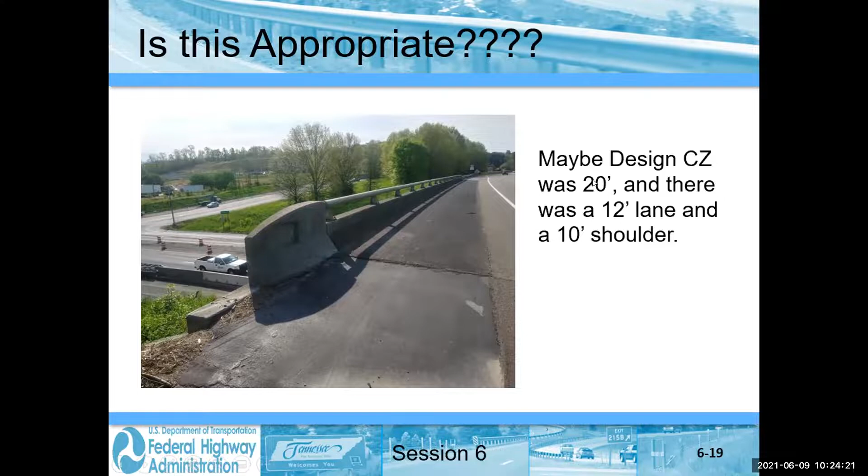So bottom line, what I use is my gauge for what I'm going to do. Can I go home and sleep well at night? Being a safety advocate, I may be a little more, but I'm also a cheap son of a gun, so I'm not going to spend a penny more than I need. If I don't think the risk is there, I'm not going to pay for it. But there's nothing magic about this 20 number I looked up, selected from the chart, okay?

Well, now it's your turn to work, okay? Very simple problem. As you see here, I have a bridge over a deep river, and I have a fairly nice road with a decent amount of traffic, 1250 ADT. I got 12-foot lanes, an 8-foot paved shoulder, and a nice 6-to-1 foreslope, okay? It's designed at 60. This is a new road, so I don't have it posted yet. I don't have an operating speed, so I'll use my design speed, okay?

So what would you do for the northbound traffic? That is your charge. Are you going to leave it as is? Are you going to just build the bridge rail? I mean, it's not as is, you're building a bridge, so just build the bridge rails and say that's good? Or are you going to do something? What all are you going to do? I want to know what's going to go in your bid document to treat this particular situation.

And I will give you a half an hour plus 4 minutes. At 11 o'clock, we will come back and discuss what treatments we may or may not be applying here, okay?

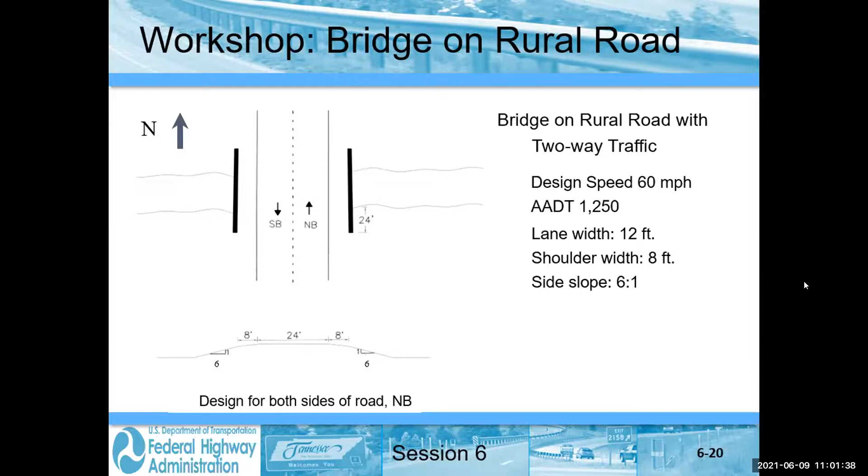Probably having available a 6-to-1 front slope cleared for a clear zone width is maybe not normal. And so this is going to be one of those 75% times, or what would be normal, where you would not be able to get length of need. But the purpose of the workshop was, if you could get length of need, one of the 25% times, how would you apply it? So we have the problem, bridge rail, and we know how to apply from the SPL1 with determining the appropriate parameters, how to apply it to come up with a LON, N sub N, okay?

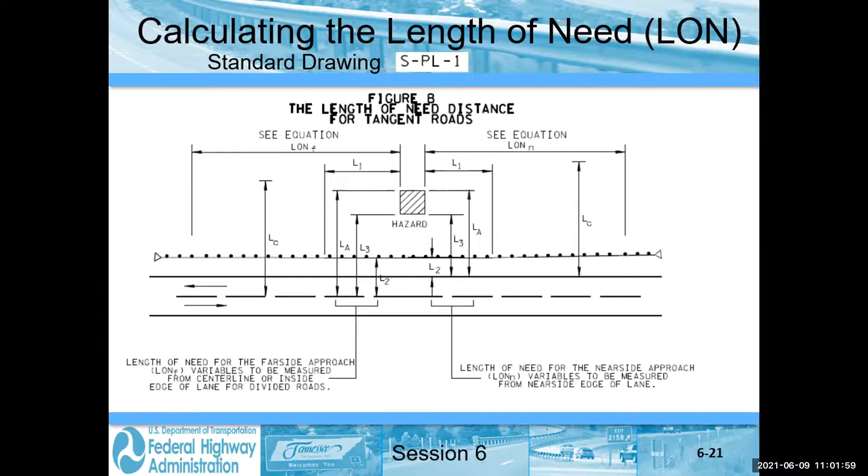And since we have 6-to-1 slopes on the side, we're not going to be flaring the standard runner rail. We will put in the earth pad and obtain our 1-foot offset for the first post of the terminal. So we will leave in our 0.75 to account for that offset on the terminal.

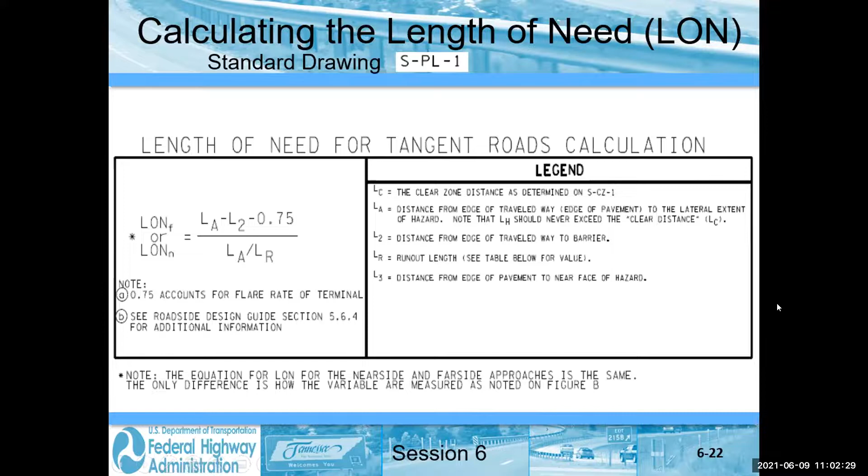Okay, so the first thing that we're going to do on a project is determine a clear zone value, which sets a general criteria that if we have something less than the desired design clear zone value that we don't like, we are going to evaluate it, first of all, with the first 4 priorities of moving it farther away, using something breakaway, etc. And once we determine we are going to be putting in - or let me also say, even if something were right outside the clear zone, you may, if there's a high risk, still want to shield that.

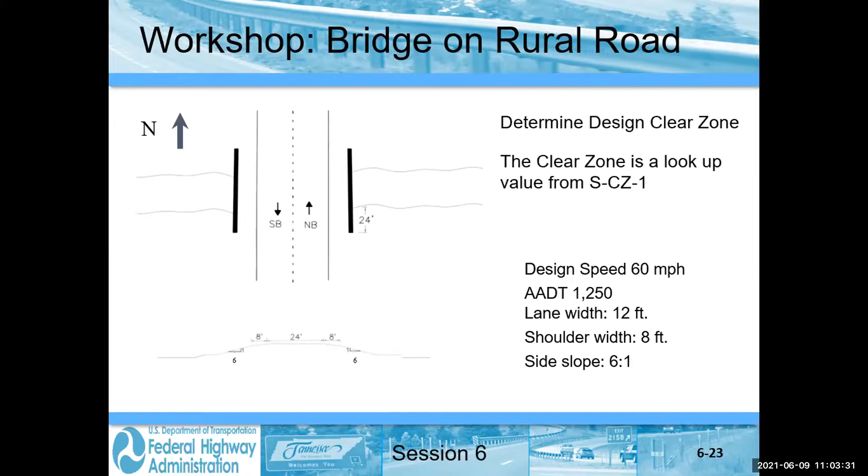But that's what we're looking for this clear zone value for, which is simply just a lookup value from the SCZ1. I say simply, but that dang AASHTO, he made it complicated. He doesn't give us one number, he gives us a range. So we look at the table and we have a range, okay? So now we're going to have to think a little more. We have the ADT that was given and the speed that was given as 60 miles an hour. We have what the cross section looks like. We had 6-to-1 slopes, and so we have the range of 20 to 24 feet. And now I have to say, well, what am I going to do?

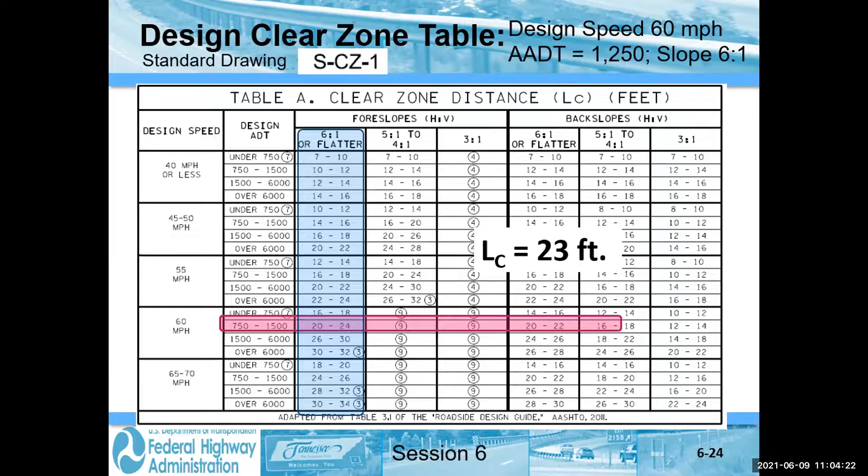Well, 1250 is a little closer to 1500, so maybe I want to be a little more generous. A 6-to-1 is steeper than a 10-to-1, so maybe I want to be a little more generous, but I'm not real generous, so I'm going to pick 23 feet. You may have picked 24, you may have picked 20 - that's your decision. That's what the range is for.

Then within that design clear zone, again not using tunnel vision only for whatever number I pick, but looking at the whole situation, I need to identify the hazards and whether I can meet any of the 4 priority approaches of removing, et cetera, or whether I'm going to have to shield. And in this case, it's pretty obvious.

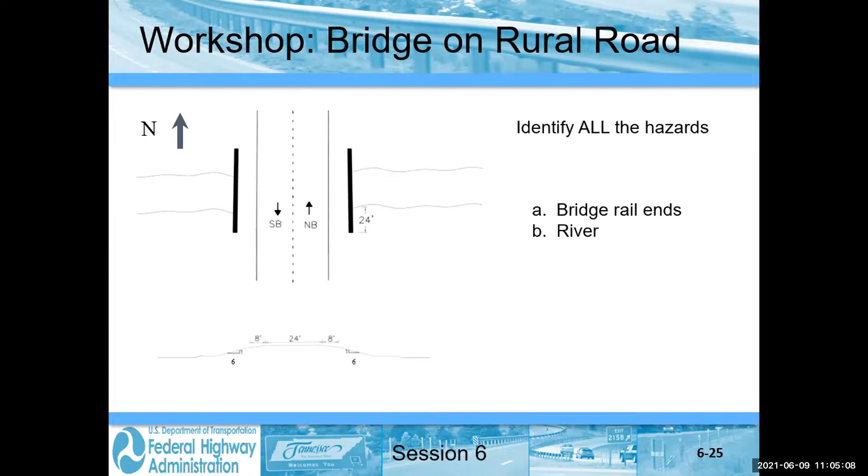I'm going to have to shield. I can't make a bridge rail breakaway - that wouldn't work. So the bridge rail is going to be obvious, very close, and then the river, which goes forever. So I'm going to limit it to my design clear zone, the part of the river within my design clear zone. So I've now identified my hazards.

Now I just simply use the formula from the SPL1. I have my design speed was 60, and I have the traffic volume of 1250. So I have a very precise number given from the table - 210 is my L sub R. Fixed, no argument. What if I had a design speed for some reason of 55? Well, your choice - you could use 210 or you could interpolate between 160 and 210 and get 185. Doesn't matter, it's just a procedure. You use it as you think appropriate.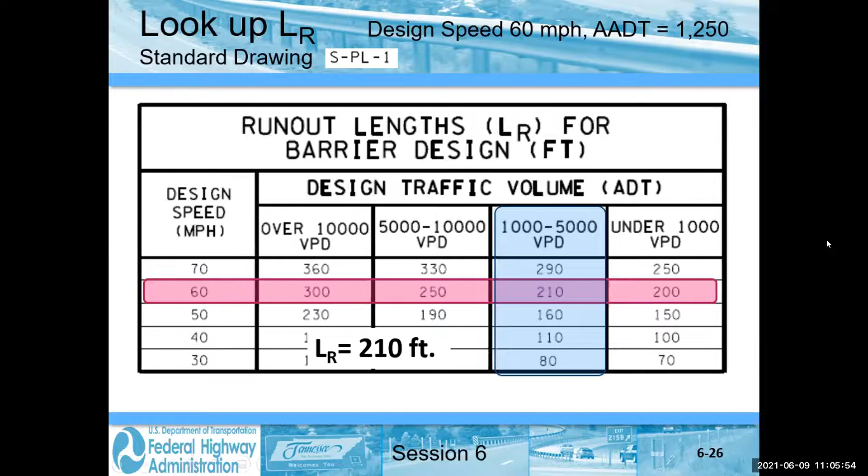So now I've identified my hazards. Now I have to identify the physical extent of my hazard. I know where the back of the bridge rail is, but that's going to be covered by the back of how much I'm covering of the river. So I am going to limit my back of hazard on the river to my design clear zone. I can't pick another number that's more reasonable like I did in the median opening, the dual bridges.

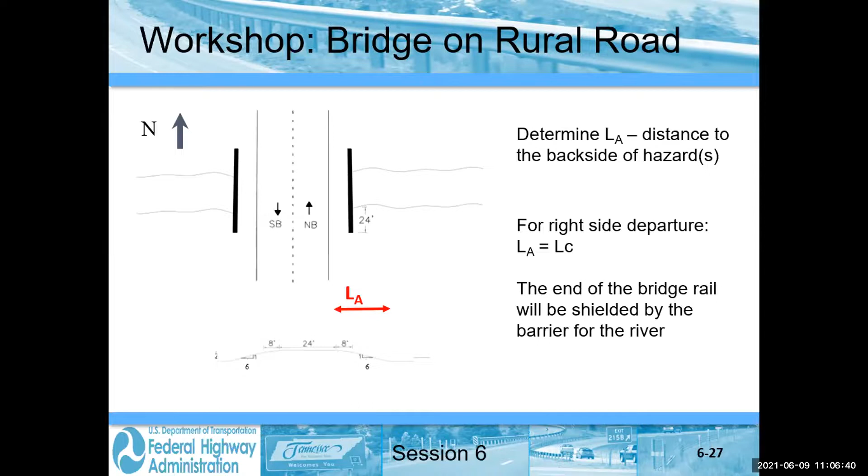So whatever I do to shield the river, I will be taking care of the bridge, except I will have to have a special attachment to the bridge called my guardrail to bridge rail attachment.

Where am I going to place my rail? Well, I have to follow my 5 principles. I would love to flare, but I can't because I'm not going to do all the grading to put in a 10-to-1 slope for some distance coming out. Some places will do that for a short distance - there's the advantages we talked about, but typically I'm not going to do it.

I don't have curb I don't have to worry about. I have a 6-to-1, which only gives me the allowance to place a 6-foot long post with the face of rail at the slope break point on my 6-to-1 slope. Not the general guidance, just thank Ollie for giving you that, doing a reasonable practical approach. So the L2 will be putting the face of rail at the slope break point at the edge of the shoulder - that's as far as I can get it. I cannot move that face of rail down the 6-to-1 slope. That is not allowed.

So my L2 is set by the slope in front criteria and the soil support criteria of the 5 principles. Since I don't have curb, I don't have to worry about that. And I've taken care of my 5 principles.

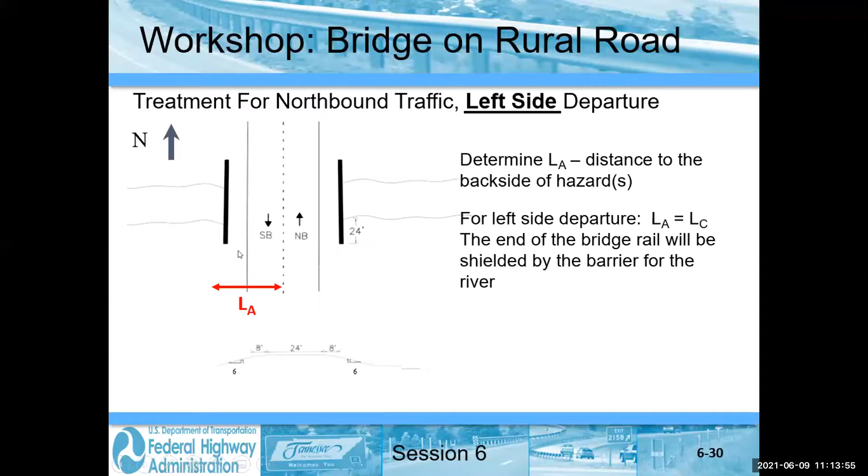So I don't have to worry about shielding the end. Whatever I do for the extra 3 feet or 2 feet, whatever it is, of hazard, will be taken care of by the bridge rail.

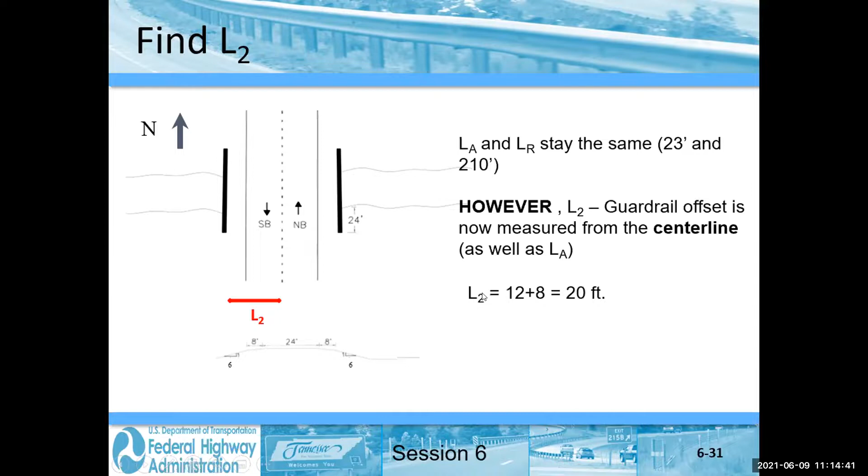So again, recognizing that these measurements, the values stay the same, but the point of measurement is going to change. So my LA is the 23 feet. My LR stays the same, no difference for that. The distance from the beginning of the hazard, the bank here, up, which we picked off as 210. And my L2 is going to change. It's the distance from my center line to the face of my barrier. So its value is going to change to be exactly what I said before, the 12 plus 8, or 20 feet. So I just plug these values in.

Again, since I have the 6-to-1 slope, I can put the earth pad in, get my 1 foot offset. So I just grind out the numbers there for my L sub F, and the value that comes out is 66 feet. 66 feet of effective barrier from the bank of the river to the beginning of my terminal.

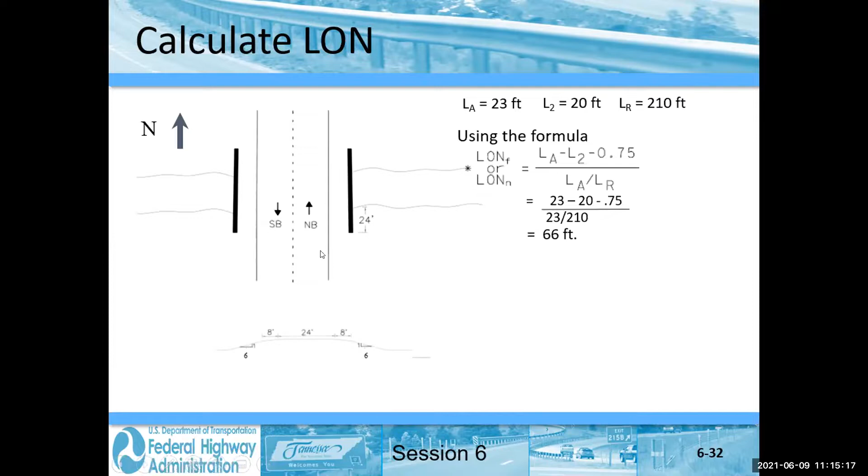So the same thing, I got 24 feet here of effective bridge rail. That contributes to the 66. I have my transition, again, 18.8 feet. And I have that same portion of the TL, the type 38, that contributes, I'll use the same 35 feet. I am going to subtract these values from 66. Well, I think you can look at it and pretty quickly tell that's going to give me a negative.

I need each one of them. I need the bridge rail, I need the transition, so I have satisfied my length of need. But remember, there's a possibility on a type 38 that you can push that head more than the length of the terminal, so we want one additional panel. So you will have the bid item of the bridge rail as part of the bridge, the bid item of the transition, the bid item of the terminal, and you will have 12.5 feet of guardrail for this location, okay?

Pretty simple, right? My question then, if you answered yes, how many times do people mess it up when they can't get it? Most of the time you're going to have a slope off of this on your local roads going down at 2 to 1. If you have a bridge this wide, it will taper back in to have maybe a 2-foot shoulder, if you're lucky you got the 8-foot shoulder. So you got a 2-foot shoulder and then a 2 to 1, okay?

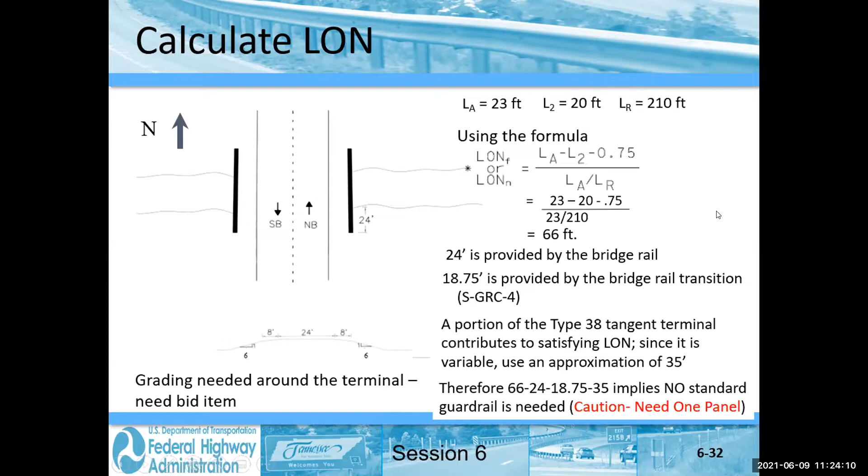Any other questions? Well, you have to see my beautiful drawing, okay? Again, don't forget about grading and having a spec for the density on that and paying for that grading as a separate item, measurable item, truck measurement, truck weight, whatever, but not as a calculated out value, volume, or a surveyed value. How do you like that, beautiful? And since you all told me I can't do math, excuse me, that number would be wrong, but the drawing would be right. I have here the transition and here the terminal. Okay, so beautiful. Thank you.

So we already went through how this would be the one panel that would be in your bid item for that side, that station left versus station right. Okay, Joel asked, would the clear zone for the far side need to include the additional 12-foot lane since it is being measured from the center line? Yes, the back of the clear zone, back here for the northbound traffic on the left side is 23 feet measured from the center line. So it's only that 2 feet or so behind the bridge rail, okay?

All measurements, whether it's back a hazard, clear zone, L2 to the face, the offset of the barrier for the opposite direction are measured from the center line, okay? If I have 4 lanes over the bridge, 2 lanes in each way, then I'm going to have, if they're 12-foot lanes, 24 feet, okay, plus my shoulder. Let's say that comes out to 32 feet.

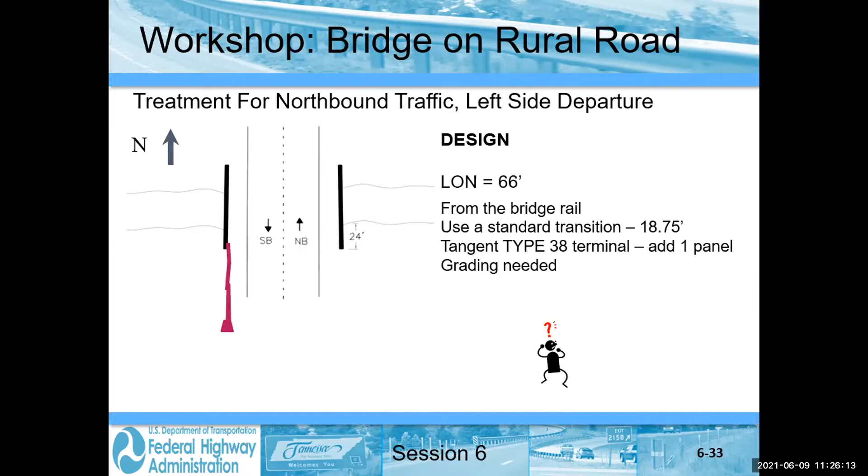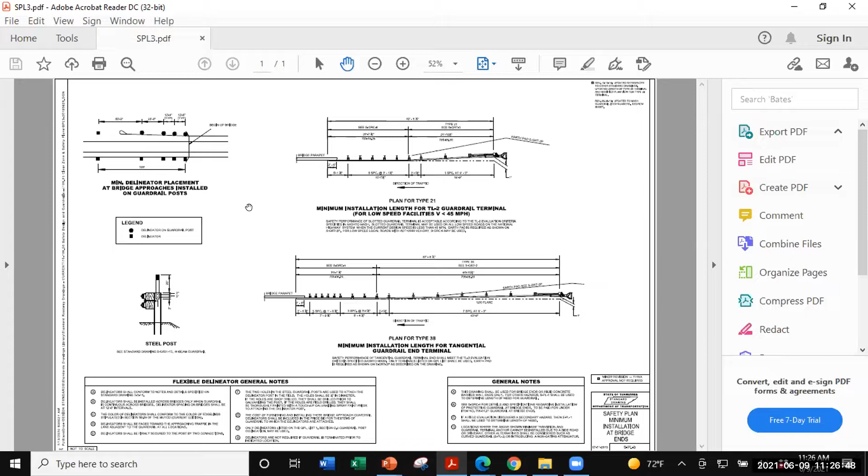Good question, Stacy. Would that extra length be accounted for in minimum installation? SPL3, you're going to make me go and pull up SPL3. Okay, great question. I do remember that these are in here. I'm going to say probably not. Ollie and I have had these discussions, and so this is probably not yet included in SPL3. Thank you very much for bringing that up.

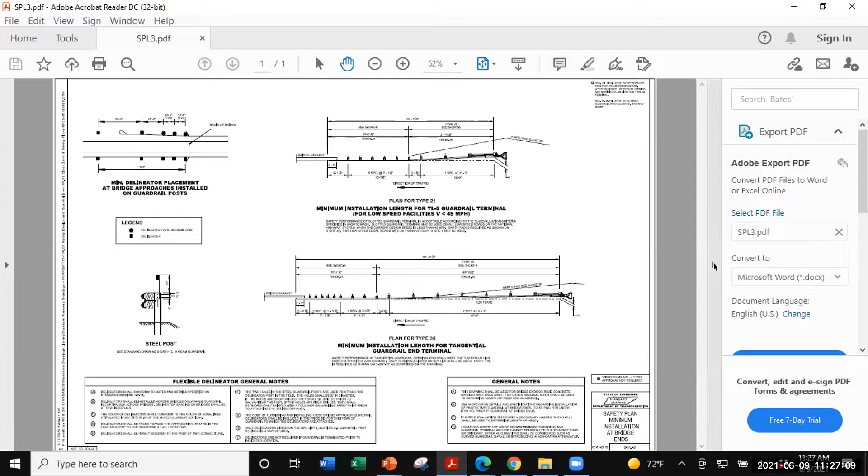So if we just have a transition and then a terminal, it would not be included in this. The way I'm looking at it without, well, I'll blow it up for you. Let's look at the type 38. Okay. We have the 20 feet, which is the 1875, okay? And then we have the type 38 attached on. So the answer to that question is no, okay?

Bill, we are revising the standard. Yeah, we are revising the standard to add a variable length at increments of 12.5 to meet length of need. This is under revision, addressing that issue. Okay, and I would add in with a minimum of one panel. Correct, correct. Great question, Joel. Thanks, and thank you, Ollie, for advising on that.

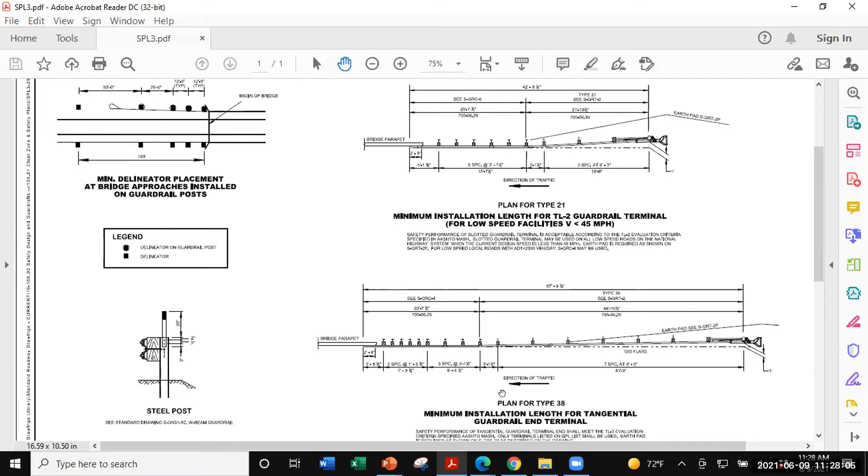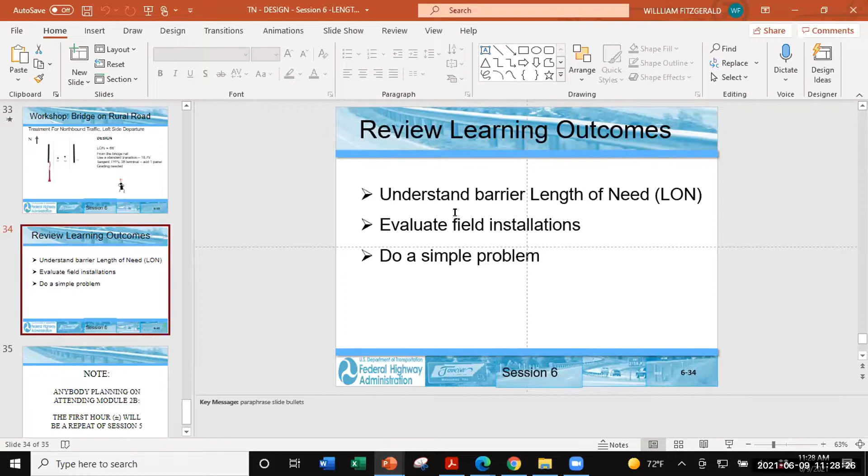I should have shut up in the first place. But I can't shut up, except now I'm going to shut up because I'm going back to the PowerPoint, and what it's going to tell me is we are done. We went through, and hopefully you have a good feeling that when you can apply, you understand what length of need is, and you will apply it. You saw those horrible examples. You're all saying he doesn't even know how to make a presentation. Okay, and then you worked. Hopefully this will help you.

Remember who you're doing this for, the traveling public, AKA you, AKA me when I come to visit Ollie. Make it safe for me, please, as much as we can. That's it, done at 11:30, half an hour extra for your lunch.